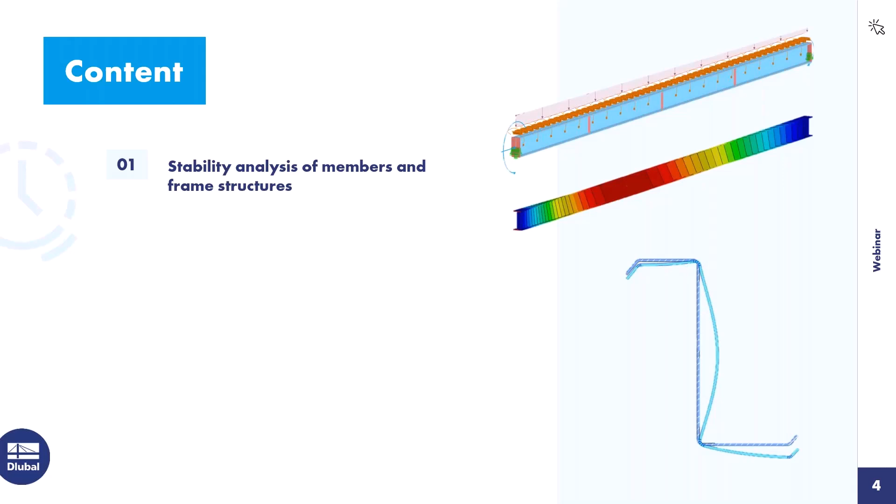First I want to focus on the stability analysis of members and frame structures. Second, I want to go to the stability analysis on a cross-section level using the finite strip method. Then I want to show you how the buckling analysis is integrated in the steel joints add-on. And lastly, I want to show you how we can use the structural stability add-on for troubleshooting of instabilities, how we can leverage that for that purpose.

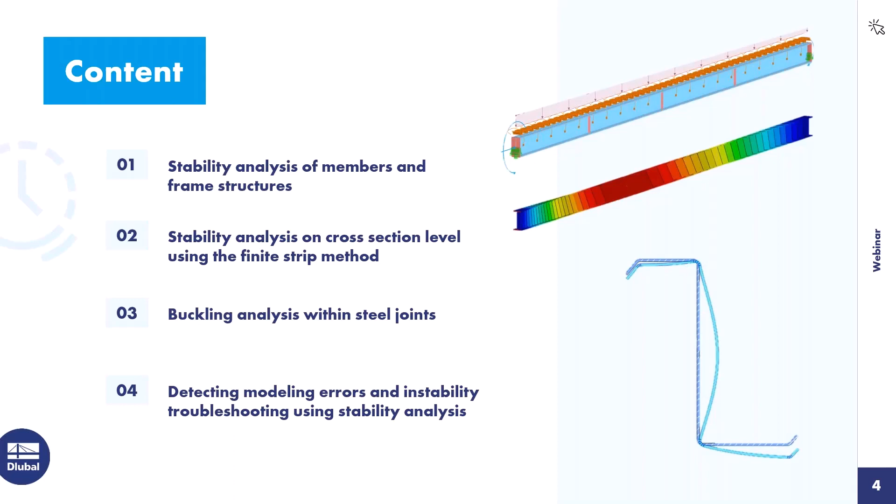Okay, before we jump into the first model, I want to give you a brief introduction and explain at the very least a few points that are related to the stability analysis and how we perform it in RFEM 6. So what elements or structures are we taking care of with this analysis method?

It's usually slender members and structures under compression that tend to become unstable, where the slenderness of a member or structure is not only defined by its dimensions—the greater the length of a structure or member compared to the cross-sectional dimensions, the more slender and prone to instabilities it is—but it's also related to material properties. So if I have a material that has high strength and low stiffness, then it's more likely that stability failure will be the critical design element as opposed to cross-sectional failure.

And then lastly, the boundary conditions play a major role. If I have rotational restraints or lateral restraints for our member, it's not that likely to become unstable. And what do I mean with unstable? When we reach the unstable state, we have no clear state of equilibrium. We have instead a bifurcation of equilibrium, so there are multiple paths that the structure may follow.

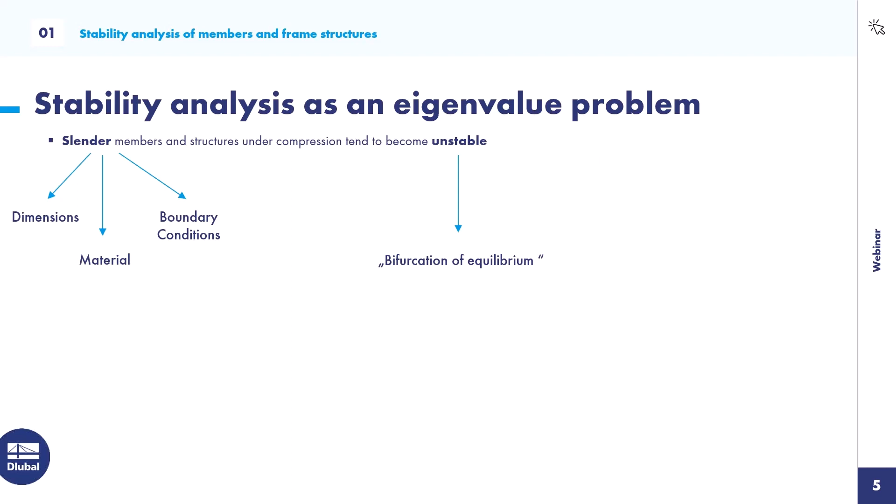That's why this linear stability analysis is often referred to as a linear bifurcation analysis, or LBA. I might use that abbreviation along this webinar as well. And also the critical load may also be named sometimes as bifurcation load.

Using the FEM, the ideal bifurcation load can be determined by solving a conventional eigenvalue problem. So we can set that up and solve that. In that context, what does ideal mean? It means for the stability analysis that we treat the structure as linear. So we assume a fully linear structure behavior and a perfect geometry, so the base geometry of our model is used in this stability analysis.

The eigenvalue problem in the general formulation has two symmetric matrices, A and B, the eigenvalues lambda, and the respective eigenvectors x. To solve for the unknown eigenvalues lambda, we have to set the first term of our formula to 0, and that's mostly done by calculating the determinant of this first part in the bracket and setting it to 0. We have multiple numerical tools or solvers to do that.

In our specific case, in the stability analysis, our two symmetric matrices are represented by the linear stiffness matrix and the geometric stiffness matrix. The geometric stiffness matrix is dependent on the loading conditions. That's also why, before we can solve a stability analysis, we need to perform a structural analysis to determine the internal forces in the system and the entries in the geometric stiffness matrix.

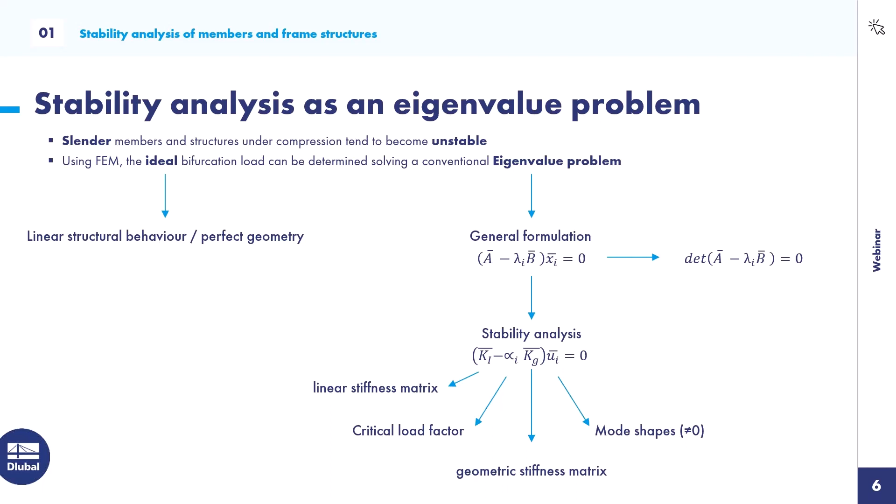In the first step, I want to go into our program now and try to simulate an Euler case 2, and make a small comparison to see if we can evaluate the correct critical load according to Euler, and what else we can get from this structural stability analysis. So let's jump into the program - I have prepared some smaller models for you.

The first one is this simple Euler case. I have an HEB 300 beam with a length of 5 meters, and I applied a unit load of 1 kilonewton that sets the member under compression.

In order to perform a stability analysis with our add-on structural stability, I need to first activate it, and I can find it in the base data of the model. I activate the respective add-on here, which you can find under analysis add-ons, click OK.

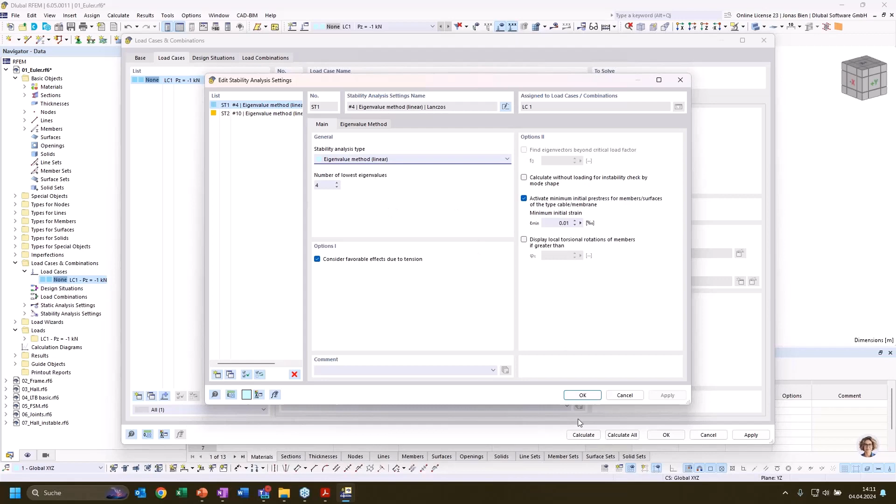4 eigenvalues are enough for our simple case, so I keep this number set here. And then we have these multiple solver variants to solve the determinant of our eigenvalue problem. But the default solver should mostly suit us for this problem.

There might be cases where you have subsystems that are not connected to each other. Then this default solver will throw an error and suggest another solver variant. But with these default settings, I can just run the load case.

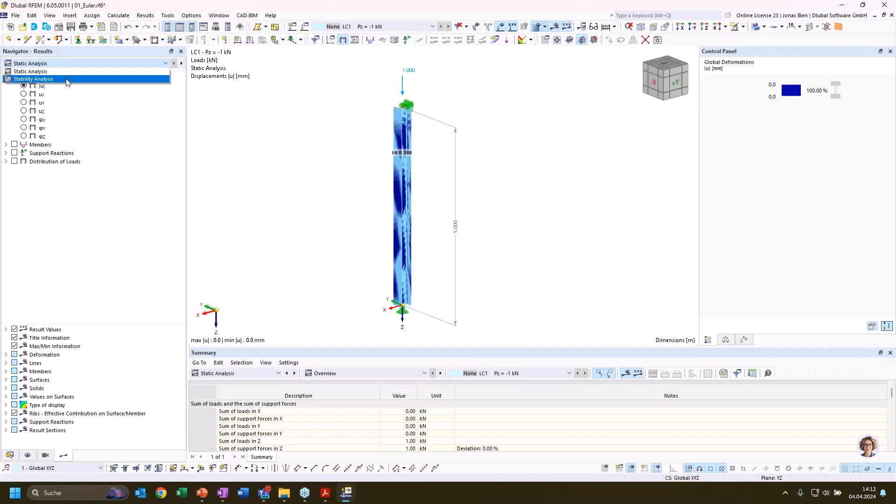Now the first thing the program is doing is solving the static analysis, and then solving for the stability analysis. When I have performed the stability analysis, I not only get the results for the static analysis, but I can also switch to the stability analysis results using this drop-down menu here.

Okay, so what do we see here? First of all, we get a drop-down menu here in the upper left corner, and also in the table we can see that we have these 4 mode shapes calculated with a respective critical load factor.

This represents the factor which I can multiply the external load with until my system would collapse due to instability. So if I would increase the unit load of 1 kilonewton up to 7,035 kilonewton and run a second order analysis, my system would become unstable and I would get an error message saying so. So I can read these critical load factors here.

Then we have also a magnification factor, which is also known in steel construction as the Dischinger factor. It can, in some cases, be utilized to calculate internal forces according to second order theory by just multiplying this magnification factor to the first order internal forces. That's not commonly used, but I just want to highlight that this is the magnification factor because it's denoted with the parameter alpha. And in some other cases within our program, you will find that the critical load factor or the bifurcation factor is denoted with this same alpha parameter, so that you are not confused when you see this parameter in another context.

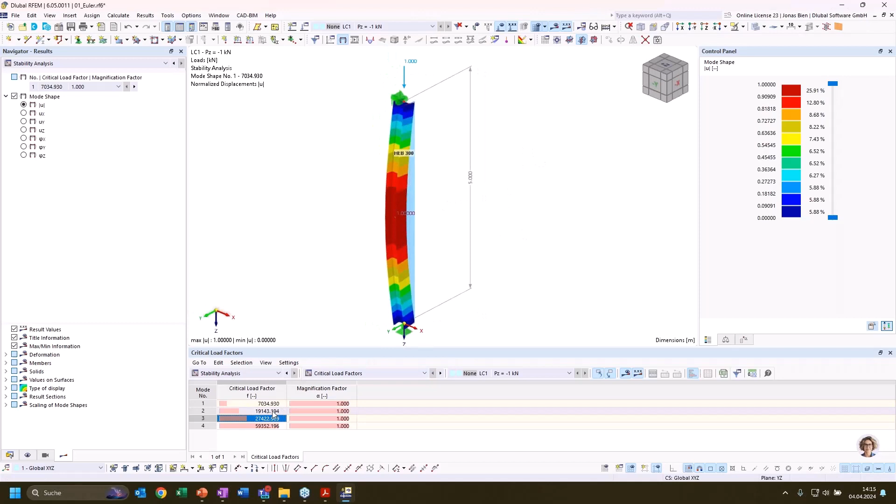Then the second mode shape would be buckling around the strong axis. And the third and fourth eigen modes are some multi-wave eigenmodes for buckling around the weak axis. These are mostly not very interesting for us, so usually only the mode shape with the lowest critical load factor is of interest for us.

And I want to now compare the critical load factor that we have calculated here with the critical ideal Euler load that we have for our Euler case 2.

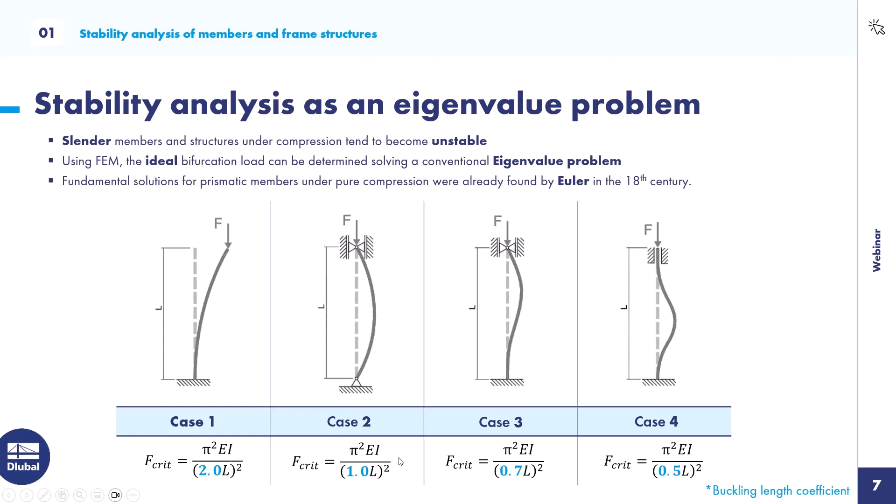Just so that you remember, we could calculate it just using this formula: pi to the power of 2 times the Young's modulus times the moment of inertia of our section, divided by the effective buckling length. In this case, it would be the length of our member times 2, to the power of 2. And I could do that using my calculator, but then I would need to look up all the values for my section, the member length, the material properties, and so on.

So I want to show you an alternative solution. We can also use the in-app console that we can open via the toolbar. And in here, I can reference all the objects that I have in my model. For example, I could reference my material number 1 by typing this and then typing a dot, and then I see all the options or the properties that I can ask this object for.

For example, I would find the elastic modulus here, and if I press enter, then I get as an output the elastic modulus of our material number 1 in SI units. So that's important. And of course, I can do some more complex calculations here. I could now take this elastic modulus and multiply it with the moment of inertia of my first section.

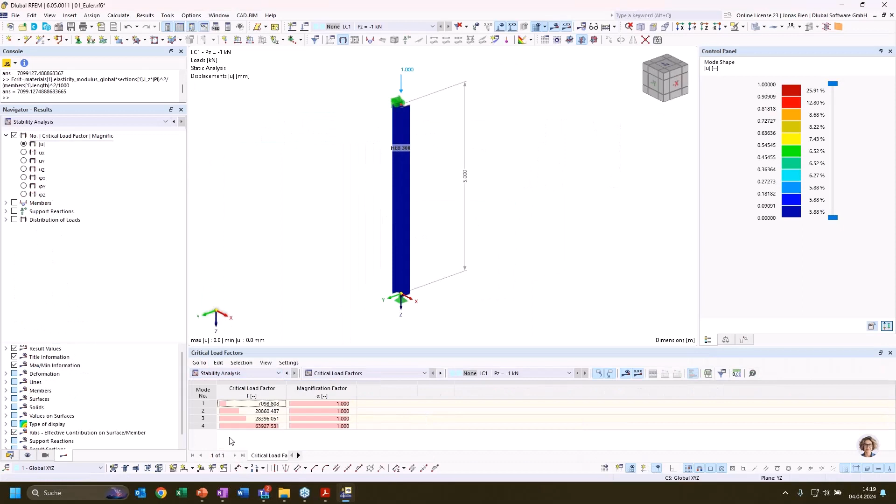So if we want to compare values, we can manually deactivate the shear stiffness for our section in RFEM and do the calculation again, and see what our critical load factor would now be. And if I again go to the results, we now see that our critical load factor is much closer to the ideal Euler load.

It compares very, very well.

So we could, of course, also calculate the critical load for buckling around the strong axis. We just need to swap the Z with a Y value, and we have the moment of inertia about the strong axis. This value is quite satisfying when we look at our result from the structural stability add-on. So that compares quite well. We've, as we expected, met the results of the analytical formula.

Now that that's set and we are confident that our solution provides reasonable values, I want to show you another important result of our stability analysis when it comes to member results. This is often used for the later design of the column. If we, for example, take a classic approach to design this steel column using an equivalent member method, we would need the effective buckling length. We can use the structural stability add-on to calculate the effective buckling length for this equivalent member method.

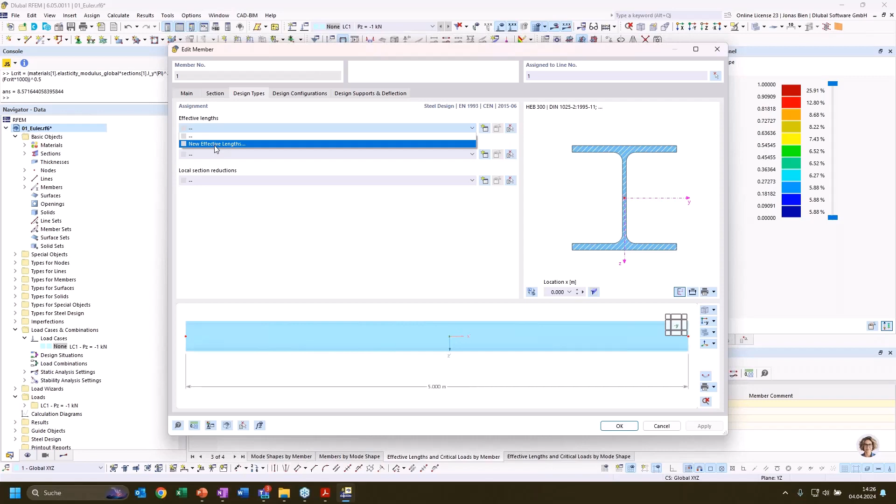One thing I want to show: we can directly import these buckling lengths into our design add-on. If I want to design this column with our steel design add-on using the equivalent member method, I have to assign these effective lengths, and here I have the option to import the buckling length from the stability analysis.

If I click this, we get another tab where I can enter the load case, the mode shape, and the member number. Now it would take this buckling length coefficient from mode number 1 for beam number 1 and evaluate the effective buckling factor, using it for the design.

In this case, we have to take care that buckling around the strong axis happens in mode number 2, so it is observed in mode shape number 2. So we would need to enter mode shape number 2 here, and mode shape number 1 would be for the buckling length coefficient for buckling around the weak axis. So that would fit and suit our expectations.

Of course, we can do that for more complex systems as well. We just need to keep in mind that when we have a more complex system and change something, the order of the mode shapes can also change. They are always sorted by the lowest eigenvalue or the lowest critical load factor, so the mode shape with the lowest critical load factor is always mode number 1. If we change something in our system, this sorting can change, but these entries need to be checked again because they are not smart enough to adapt to the changed model.

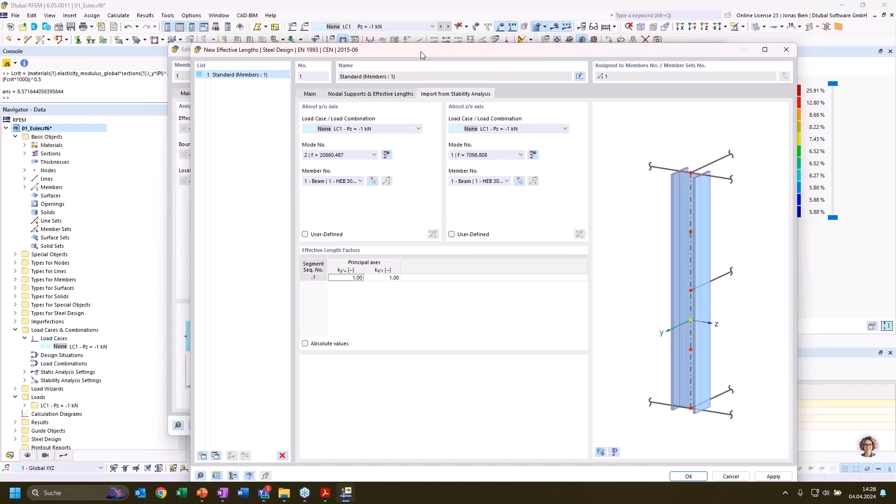So we would do that manually. That's something we need to take into consideration and always keep in mind. Sometimes it's just better to do the stability analysis and then manually put in the buckling length coefficients here, so we don't need to make any thoughts about it anymore.

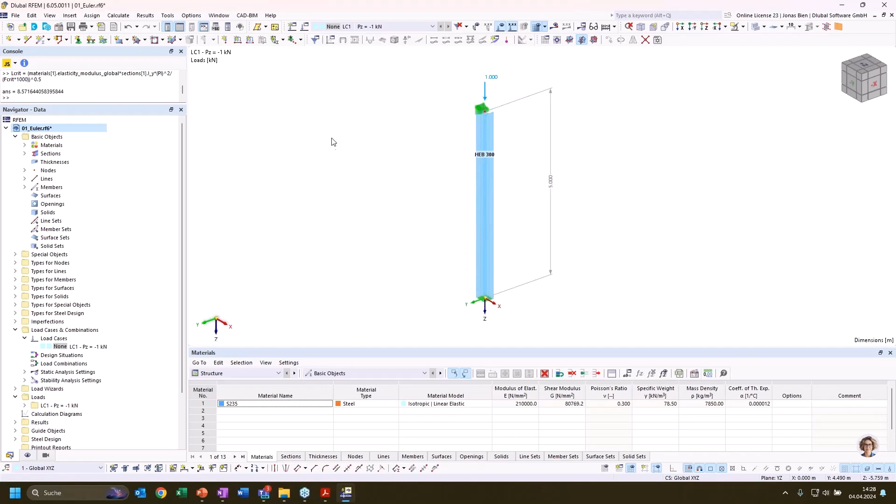All right, but that's not what I want to focus on now. I want to show you instead how the buckling length coefficients change or adapt when I adjust the statical system. So when I, for example, take a rigid boundary condition at the member at the bottom of this column, it should calculate a lower buckling length coefficient because now the system resembles Euler case number 3.

We know that here we would expect a buckling length coefficient of 0.7, and that's exactly what we get for the first mode shape for the weak axis and the second mode shape for the strong axis in this case.

We also need to take into consideration that for these cases, why should I use my add-on here? Because these cases are known, I can just apply the Euler formula and calculate my buckling length.

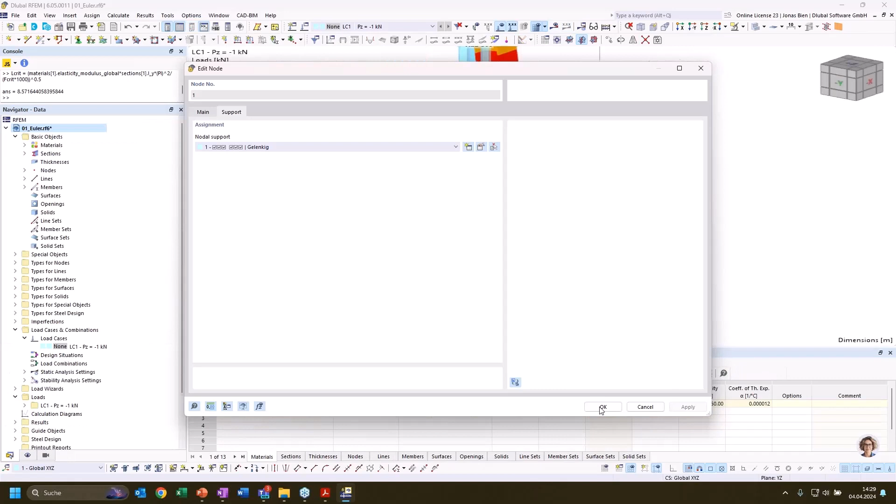But what if we have something like a certain spring stiffness here, which means I'm with the stiffness somewhere between Euler case number 2 and Euler case number 3? Here it's not so obvious what the buckling length for our equivalent member check would be.

Of course, we could look into textbooks that have these cases covered, but also here we can use the structural stability analysis to evaluate the effective buckling length factor. As we expected, it is between 1 and 0.7.

So everything's set. Because it's a linear analysis, it's interesting what the program does with nonlinearities. So, for example, if I apply some kind of nonlinear boundary conditions here, which at first glance don't look that nonlinear...

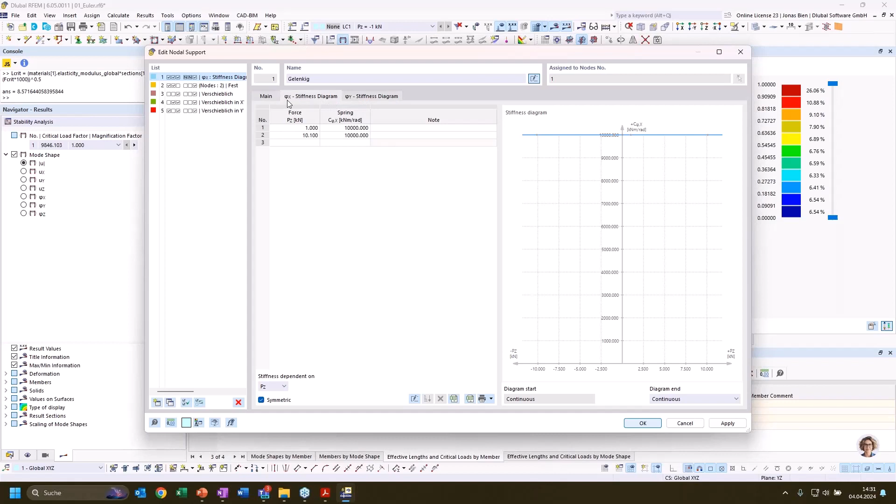...because in this case I want to apply a stiffness diagram where I have the stiffness of our spring at the column bottom in relation to the vertical load. But as you can see, it should be constant, and no matter what the vertical load in the column is, the spring constant should always be constant. So it doesn't look nonlinear at first glance, but we have to take into consideration that all these nonlinearities are ignored in the structural stability analysis.

I want to just demonstrate this. So although we have set this nonlinear spring stiffness at the bottom, as a result we get Euler case 2, where a pure hinge is assumed at the bottom. So when it comes to the supports, only these entries are taken into consideration for the structural stability analysis.

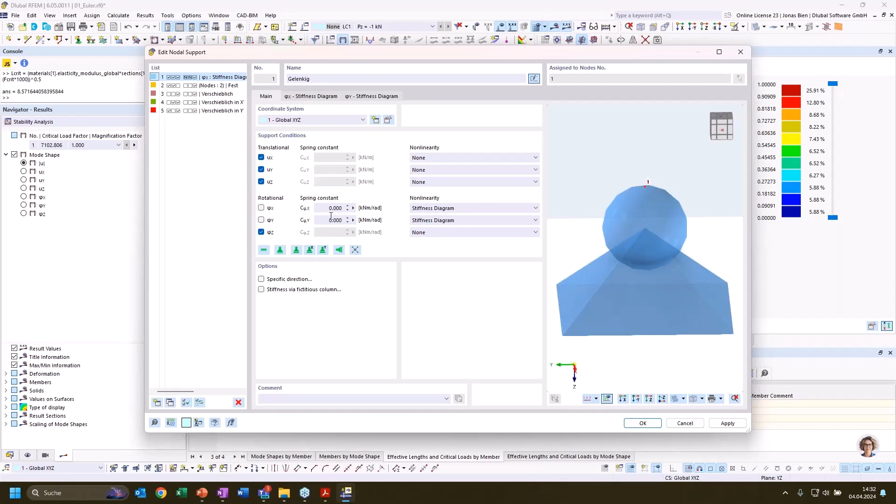Of course, when we are working with other nonlinear elements such as tension rods or buckling members, these are taken into consideration or not according to their state in the static analysis. So if we have a tension member that is under tension, it will be taken into consideration in the structural stability analysis as well, and vice versa.

Okay, then one last thing to finish this simple example here. Let's delete this nonlinearity and see what happens if we divide this member in half.

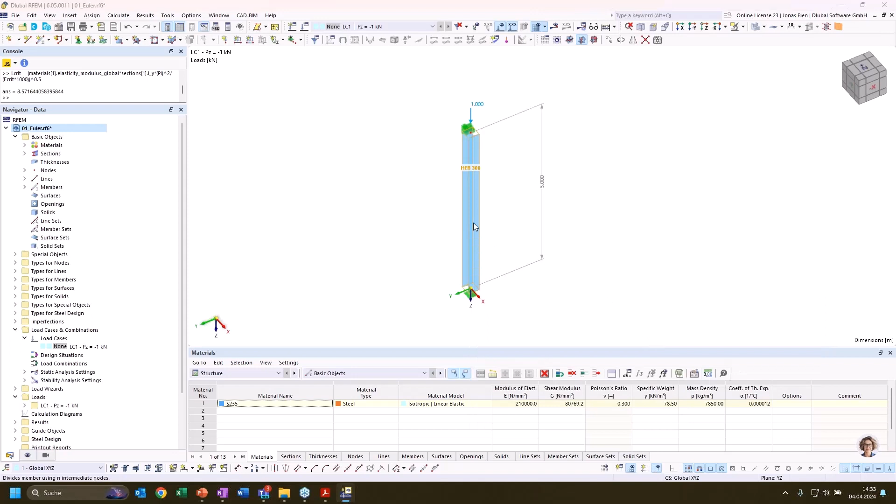I just introduce an intermediate node and divide this one column into 2 separate members, and again run the structural stability analysis.

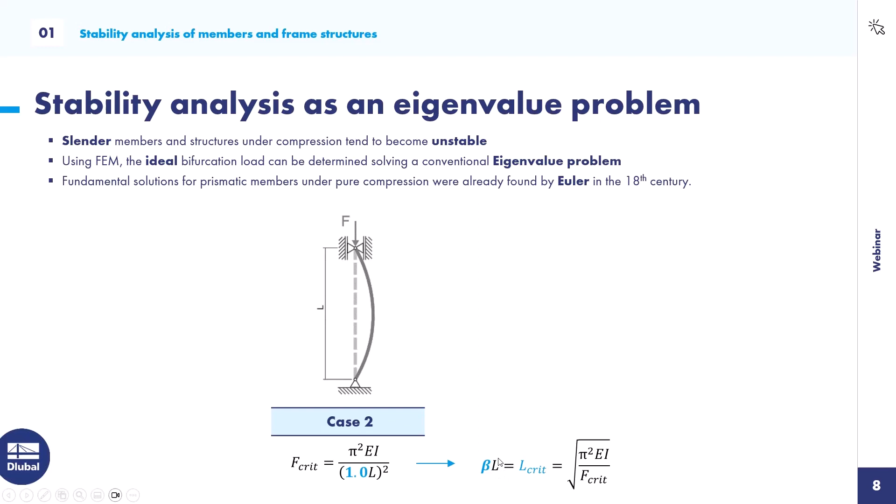So now we have two members, but the effective length for each member is still 5 meters, and that's what is expected when we again look at the formula for the calculation of our critical buckling length, because the Young's modulus, or the moment of inertia, have not changed, and also the critical load factor has not changed. The only thing that changed is our reference length L for the member. It's divided in half, and that is then only visible in the buckling length coefficient, which is now 2 instead of 1 for each of the members.

So we could still use this effective length factor for the stability design within steel design, or some design add-on. It would still be valid.

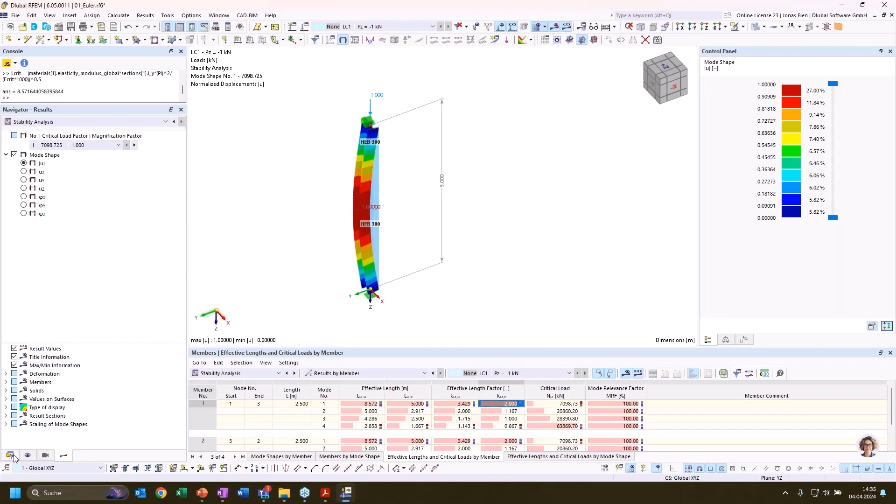Okay, now let's jump into, or increase the complexity a bit. So what if we have more than one member in our model?

So in this case, we have a 2D model of a 2-hinged frame with an additional column number 5, that is just connected to this 2-hinged frame by a truss member. So this is basically a simply supported column, just as we have seen it before, which leans toward this 2-hinged frame here, or is supported by the 2-hinged frame at the column head.

All 3 columns, so member number 1, 3, and 5, are loaded with a load of 1000 kilonewton in compression. And now let's perform a stability analysis for this load case as well. It should be all set for this analysis, same settings as we have used them before for the Euler case.

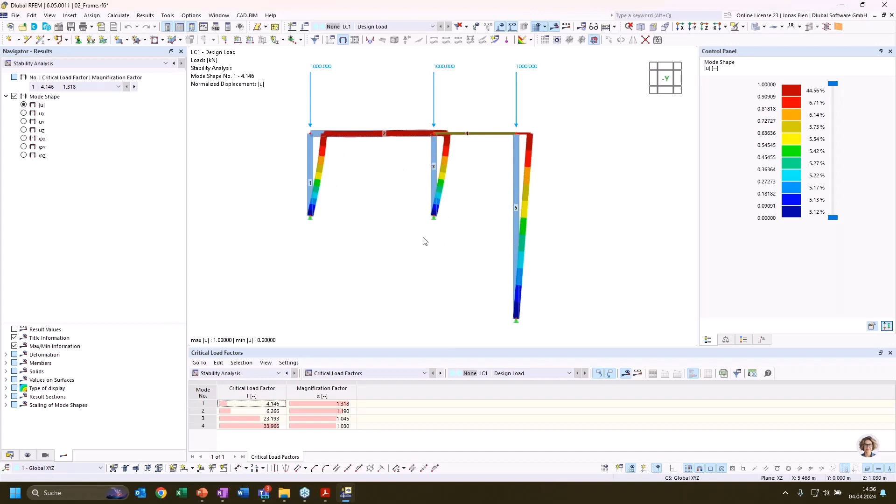And accordingly, we also get 4 mode shapes for our structure. I want to quickly browse through these mode shapes together with you. So the first one is some asymmetric lateral deformation of the 2-hinged frame, and also this connected pinned column is also moving with the 2-hinged frame.

Then the second mode shape would represent buckling of the longer column with the pin supports around the strong axis. The rest of the structure does not seem to have any deformation. And the third would also be a higher mode of this pinned member number 5, and mode shape number 4 would resemble a symmetric buckling mode of the 2-hinged frame without any participation of the simply supported column here at the side.

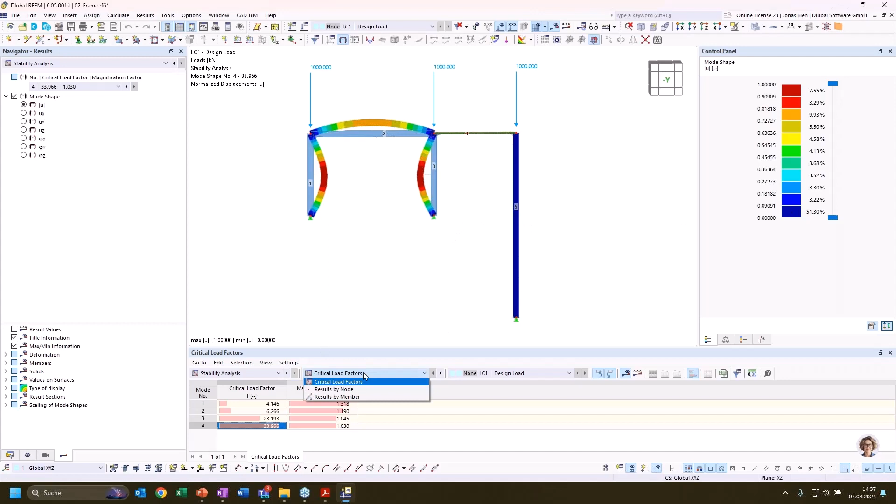So if we want to now extract the effective length, for example, for the columns here of the 2-hinged frame, we can again go to the member results of the stability analysis and check the effective length by member, and I can then click on one of those members, and I will automatically be routed to the respective table entries.

And now in the first mode shape, as we have seen, this 2-hinged frame suffers from buckling around the strong axis, and we could read the effective length factor accordingly for the strong axis in this column right here. So we would get an effective buckling factor of 2.8, which is also in the realm of the expected results for such 2-hinged frames.

If we now neglect this simply supported column here at the side, we would expect some effective buckling factor higher than 2, and the exact value would be influenced by the stiffness of the girder and the columns, and of course the length and so on. Now with the additional column, it's also influenced by that. So that would be quite clear.

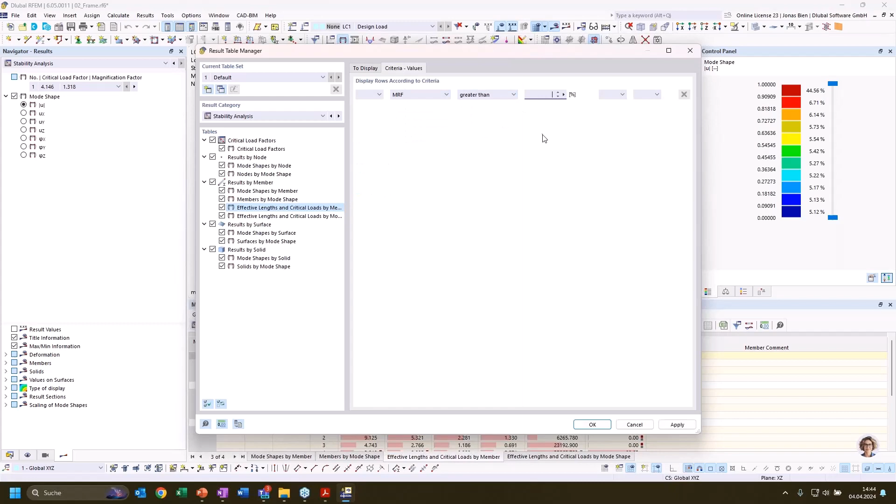Because here I would go the other way around. When I'm interested in the relevant buckling factor for column number 1, I would go through the modes that I have calculated and only take into consideration the mode shapes that have a mode relevance factor that is significant, and read my buckling length factor from the mode that has the lowest critical load factor. In that case, I would definitely take the value of 2.8 for column number 1 and also for column number 3.

All right, but I want to show you in the next step how we could also leverage this tool in a more realistic setting, or how to approach the buckling length determination in a more realistic model.

So here we have an industrial hall. We have a lot of different load cases here that of course would give us some, I don't know, probably about 100 or 200 load combinations. Of course, in some applications, we can have a lot more load combinations.

And then the question is which load combination, or the first question for our buckling length determination, is which load combination is most severe for buckling for a specific member. And I have now, for this case, deliberately started with result combinations, because sometimes, for example, when I want to design bridges or so, I may have 10,000 load combinations, and it's not possible to calculate all 10,000 load combinations and assess them for stability.

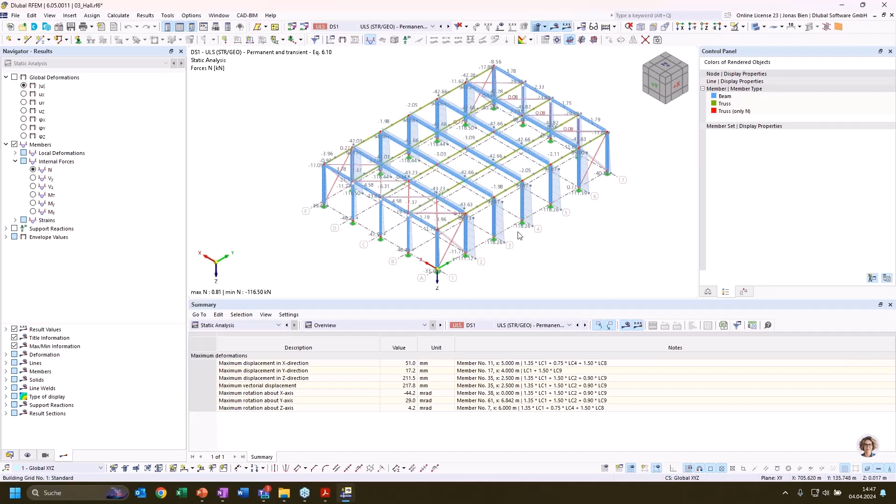I would, in the first step, calculate my combinations with result combinations to get the envelope of results. I need to calculate the design situation where all the complete envelope of result combinations is given. Then, for example, when designing the columns for buckling, I would look into the internal forces in this envelope solution and look for the most critical ones for buckling, which would be the combinations that give the highest compressive load in the columns. I can find those if I go to the static analysis results for this design situation.

Go to results by members, internal forces, and let's stick to this middle column here. I click the column and get, in this result combination, all extreme internal forces for this member. So for example, I get the combination with the highest axial load, including the sign, and the lowest axial load. The same is printed for the highest shear force in Y direction, highest shear force in Z direction, lowest shear force, and so on. But we're interested in buckling, so I'd look for the combination giving the highest compressive load, which is this one here with minus 116 kilonewton. In the last column, the loading or load combination that leads to this axial load is presented.

Now, from the result combination, I can just right-click this combination to generate a load combination from this table. For this load combination, where I have the feeling this could be the most relevant for buckling of our columns, I can now perform an eigenvalue analysis, a linear stability analysis, by activating it here and calculating it. So now I very specifically run the stability analysis for just this one load combination that I've generated from the envelope.

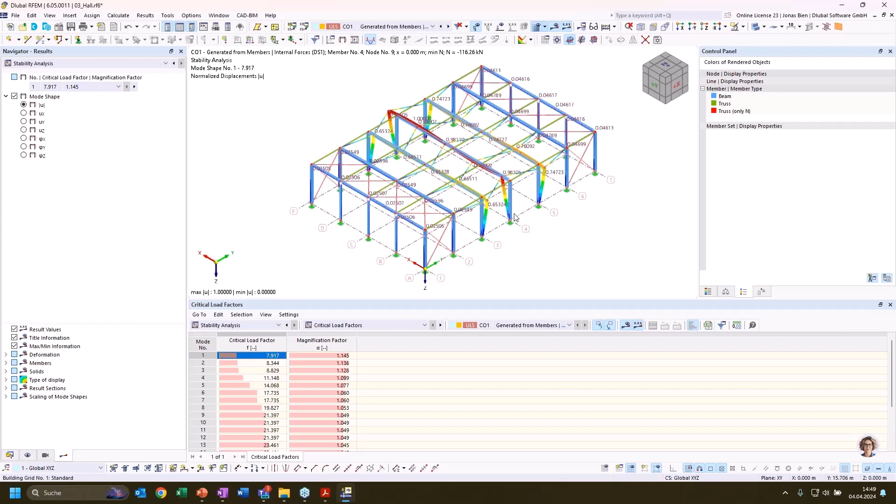Now the second question, after sorting out which design situation could be relevant: I need to figure out, for this column, which mode shape is most relevant for determining my buckling length. As before, I have 20 critical load factors and mode shapes, and I can browse through them. I see some involve deformation or buckling of the frame where this column is involved. Some are only isolated buckling of those columns, or some compressive member in the roof. So these wouldn't really interest me.

In order to filter these out, I can again use the mode relevance factor. I go to the table, effective length and critical length by members, and click on my member number 4. I get the whole table here, showing the mode relevance factor for all 20 mode shapes I've calculated, and I see that only in 2 of these mode shapes is my column member really participating. So these would be the only 2 mode shapes suitable for extracting the buckling length.

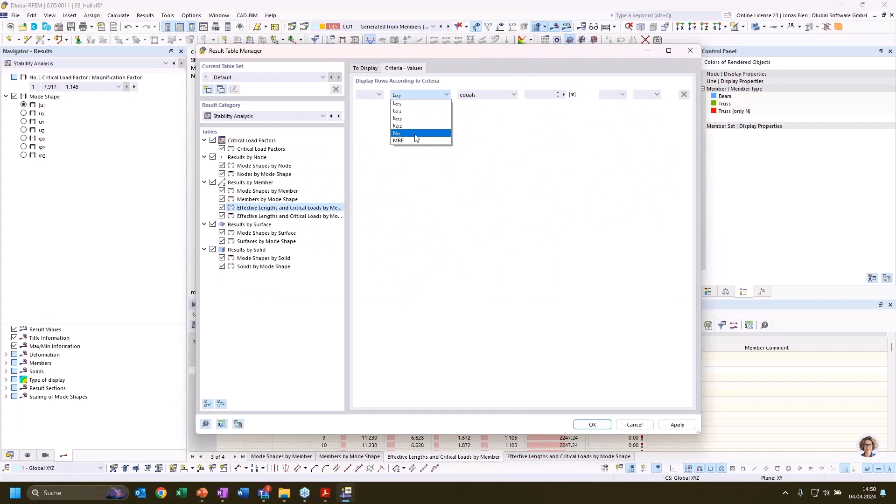I could, of course, apply the filter to make it more accessible. Then I'd follow the rule from the last smaller example: take the mode with the lowest critical load with a significant mode relevance factor, and take the effective length factor for buckling around the strong axis from this mode shape. This is how the mode relevance factor can help you assess the relevant mode shapes for a particular member design.

That's what I wanted to show you on this model. Now I want to take the next step and highlight something you may have noticed so far. We've only discussed flexural buckling of members, but especially in steel structures, other stability modes can also govern the stability design of these members, namely torsional buckling or lateral torsional buckling. We can also take those into consideration with our structural stability add-on, but we need to activate warping torsion in order to detect those stability modes.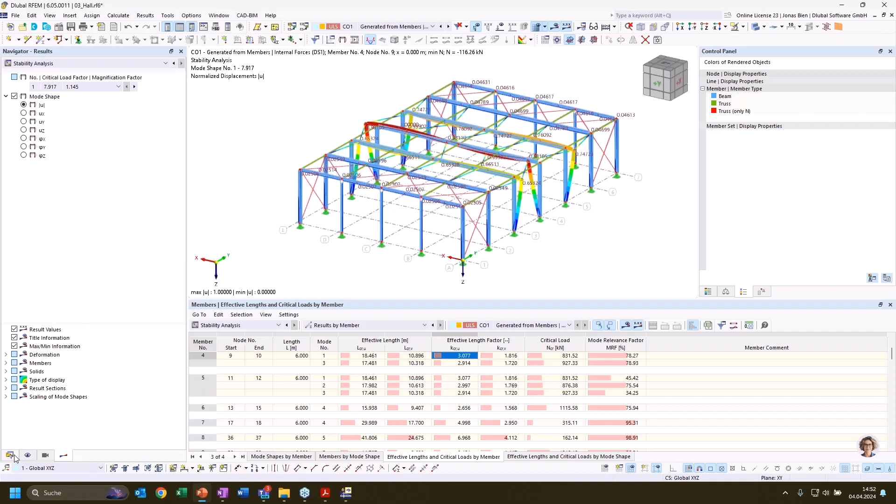I want to make another small example where we investigate the lateral torsional buckling of a simple system, where again, as in the first Euler case, we know the exact solution, and I want in the first step to compare the values we get from RFEM with the analytical value. So in order to perform a structural stability analysis where we can also consider lateral torsional buckling, we would, in addition to the structural stability add-on, also require the torsional warping add-on.

As soon as we activate the 7th degree of freedom, this would be directly included in the stability analysis, or would be taken into account. I have now for this simply supported member here, it's an HEB 300 again, with a length of 10 meters and a constant bending moment.

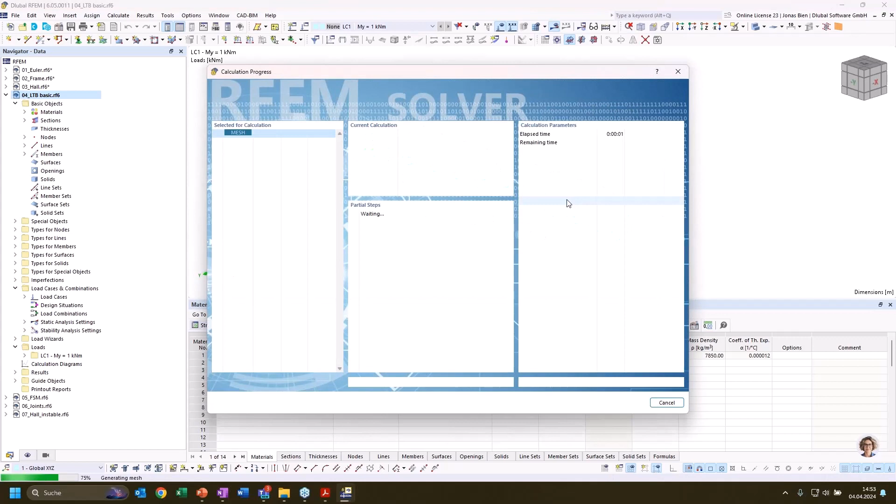I could again run the stability analysis, and now we are not only getting modes for flexural buckling - or we wouldn't get any flexural buckling modes for this member at all because we have no compression in it - but I didn't activate the structural stability analysis for this particular load case, so I will just do that.

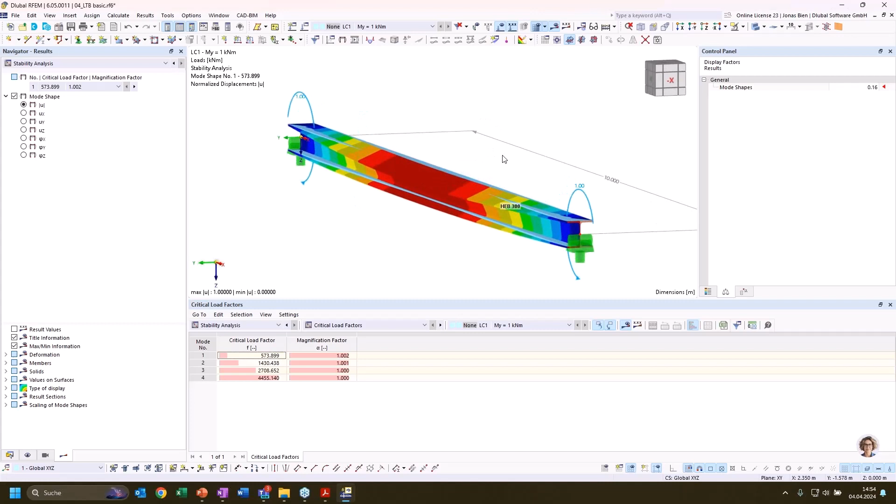And now we should get a lateral torsional buckling mode. When we switch to the results of the stability analysis, we can now see very clearly this characteristic deformation of our member. It tilts and at the same time moves in the direction of the weak axis. And again, we get a critical load factor, and this one we can compare with the analytical solution.

For this simple system, an analytical solution can be easily found in the textbooks. It was once also implemented or written down in some of the codes. For example, in the old German steel construction norm or code DIN 18800. I think in some national annexes of the Eurocode 3, it's also given this formula.

But for our convenience, I already plugged this formula to calculate the critical bending moment for lateral torsional buckling into our global parameters. So that's another thing I can do instead of just using the console and typing in my commands to evaluate certain parameters or values. I can also use global formulas, global parameters, to calculate something.

For example, I have now created a formula for the evaluation of mcrit, and we can look at what goes into it. Maybe this looks somehow familiar to you. So here we have a value or a parameter that describes the moment distribution, which is zeta. It's 1 in this case for this simple case with uniform bending.

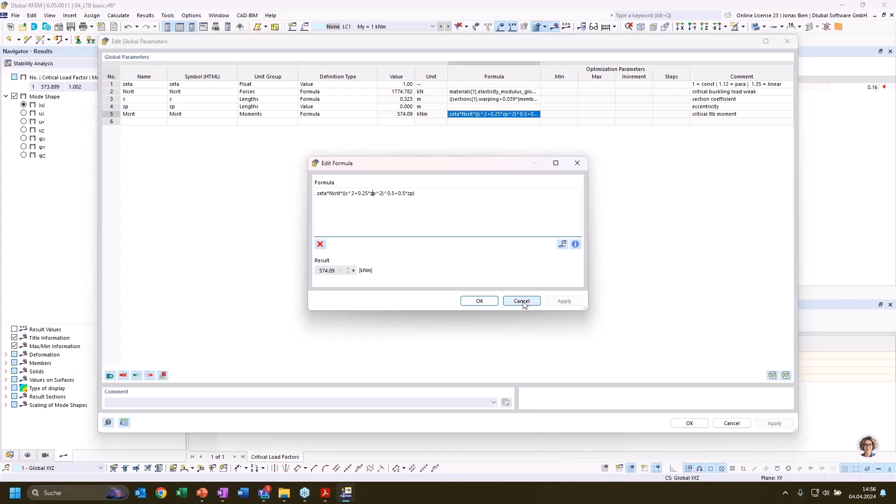We could also use the console again to evaluate this. So all the global parameters that we have stored, we can call them here in our console. And this, in this case, it's again written in SI units, so I would need to divide it by 1000 to get to kilonewton meter. And this is very close to the value that we evaluated here with the structural stability add-on. So it works again quite well.

But of course, as in the Euler case, we can use our structural stability add-on to investigate much more complex cases. For example, we could add member support. So I go to the member and add a support, and then I get this tab here where I can enter a member support. I could manually put in some rotational restraint. I could even apply an eccentricity of this member restraint. For example, I could say I have a rotational restraint at the top of the flange.

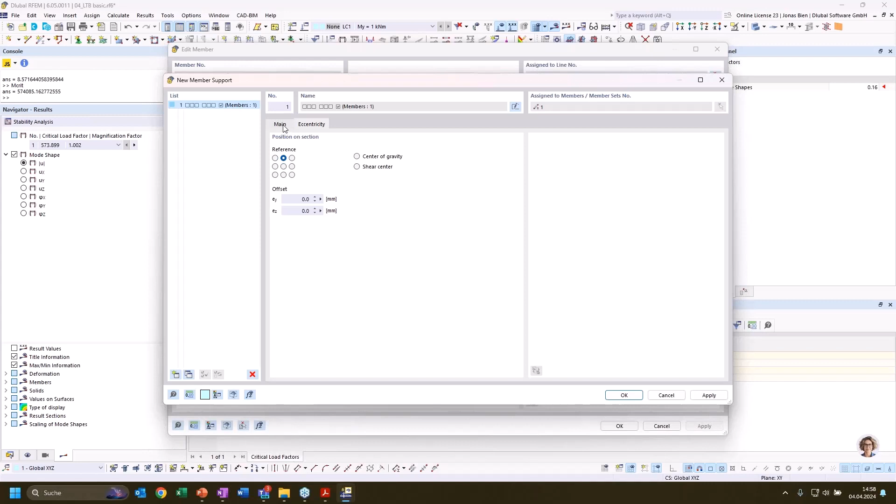And we can now also in the global analysis take into consideration shear panels and rotational restraints. So these are also entered as fictitious stiffness. And you may know them from steel design or aluminium design or timber design, where you had always access to those restraints, and they were only considered in the design of the member, so in the design add-on. But we can now use them in the global structural stability analysis as well.

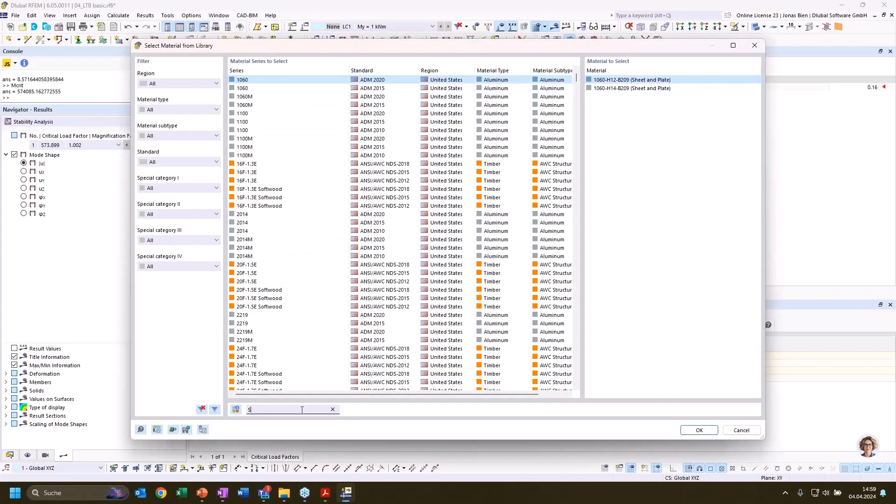So I could, for example, define a rotational restraint. For example, I want to consider some kind of sheeting that I have on top of my girder. I will now just take some random settings, more or less. I take some sheeting just to get some stiffness. Of course, these values were accessible all the time, but now we can also leverage or use the stiffness that we define here in this global structural analysis.

And one thing that is also new, and I want to highlight to you, is that for the spring stiffness of the connection between the trapezoidal sheeting and our member, and also for the load introduced to the sheeting, we can now set load dependent values.

So if we click these options here, we could, if we had multiple load combinations that we would like to investigate, set different values for different load combinations - for example, to distinguish between situations where we have suction on the roof and compression or pressure on the trapezoidal sheeting. We could take this into account by adding different values here in the table.

This is also quite new since a few months. With this rotational restraint, I could also add a shear panel. By the way, we are now able to not only add a shear panel in Y direction, but also in Z direction, which could be interesting for columns that are also girders rotated by 90 degrees for some reason. We can use that now since some weeks.

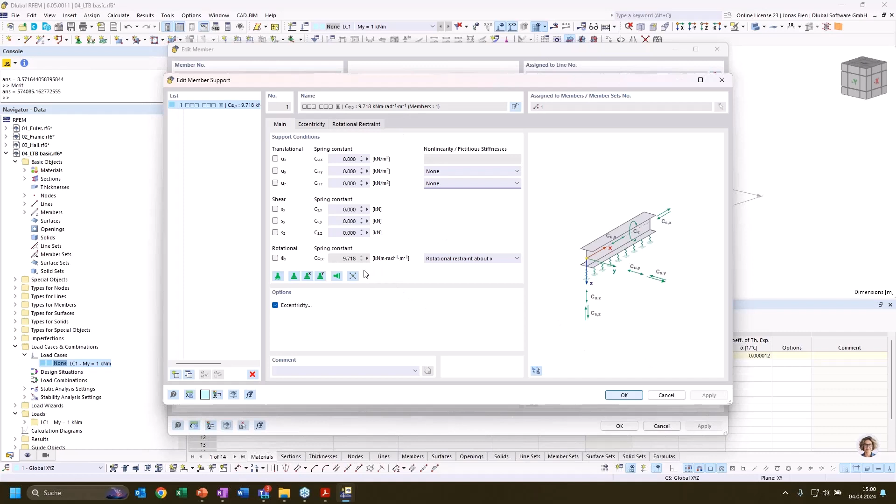And we have now calculated directly some stiffness for the rotational restraint from our trapezoidal sheeting, and we could consider this in the stability analysis to take it into account. By default, these fictitious stiffnesses, so the trapezoidal sheeting in this case, would only be accounted for in the design add-on.

So if we activate the steel design add-on, for example, in this case, because we have a steel girder, and I now activate the lateral torsional buckling check according to the equivalent member method, we already see here that the default way of calculating the critical moment value is using the eigenvalue method - the same method that we also use in the structure stability add-on.

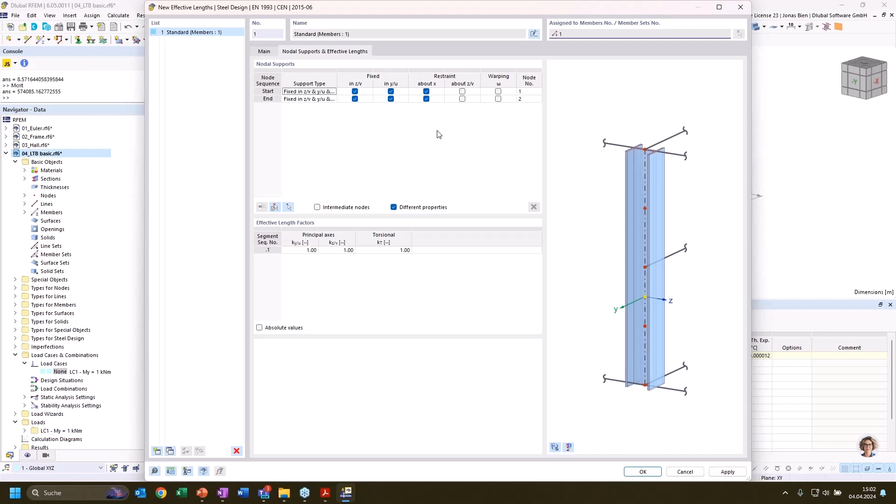Of course, we need to set some boundary conditions here for the design add-on. But in our case, it's quite simple. We have simple support with fork supports, and that's what the default settings are also for the effective length settings. So that should be all right.

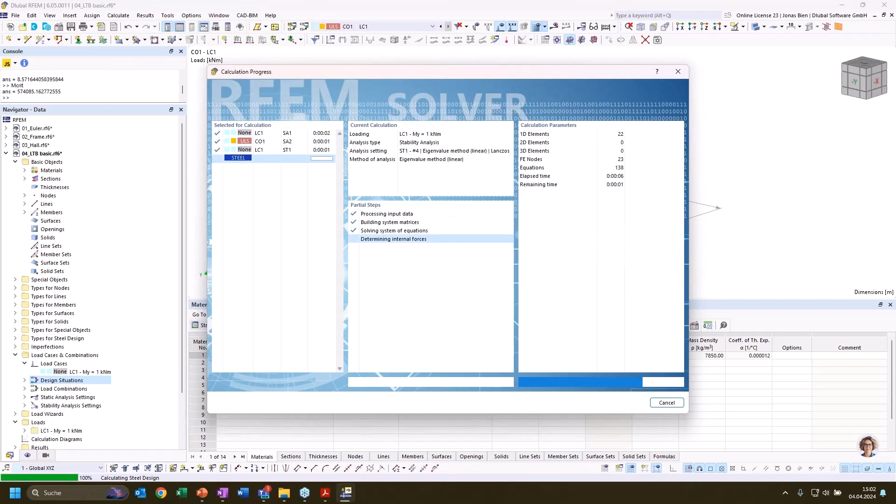In order to perform the steel design, we also need a design situation and some load combination inside this design situation. I will just add a load combination with 1 times the first load case. And if we now do the calculation, we are running a static analysis, then the structural stability analysis of this member, and then the steel design analysis.

Let's check the results and compare them. First, in the stability analysis, it seems like nothing has changed - we still have a critical moment, bending moment of 574 kilonewton meter. But in the design add-on, let's check the result here. We have now the check for lateral torsional buckling here.

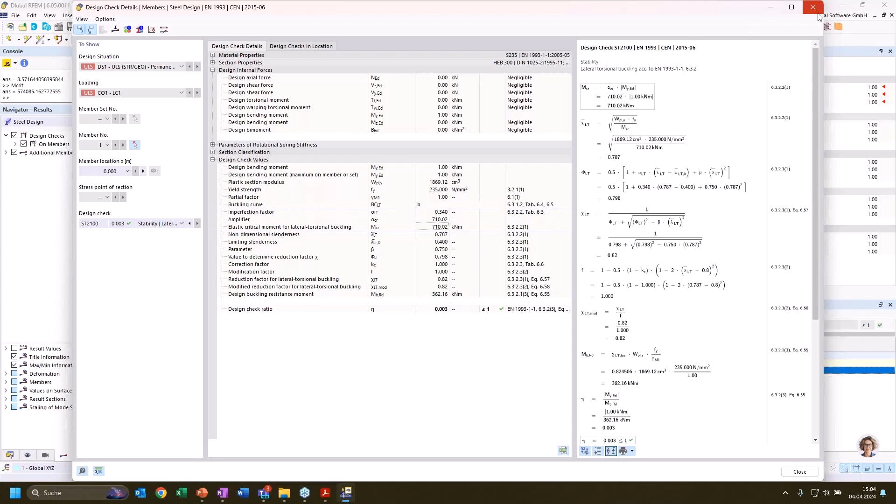We can also see what the relevant mode shape would look like if we click on this design details. And if we double click on the design details, we can also check what mcrit is, or what value for mcrit is evaluated in the internal eigenvalue analysis. We see that now in the steel design add-on, the rotational restraint on top seems to be already taken into consideration, because we have a much higher critical moment in our steel design add-on, while in the structural stability analysis the values stayed more or less the same.

But we now have the option to take these fixture stiffnesses into account also in the structural stability and static analysis. We can do that by adding a structure modification to this load case, and here we just need to activate the option to consider shear panels and rotational restraints also in static, stability, and modal analysis.

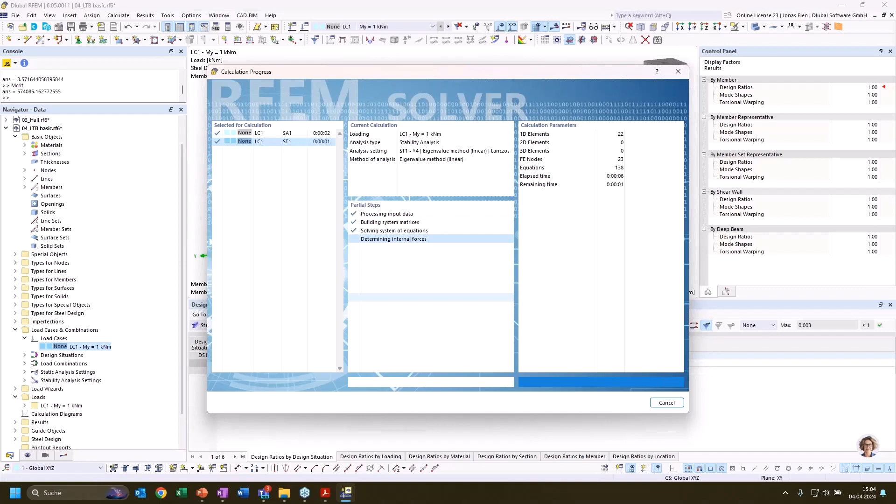Before, it was only possible to take these shear panels and rotational restraints into account in the design, so in the LTB design within the design add-ons. But now we also moved this possibility to the global analysis, because you may want to perform a lateral torsional check, like using a second order theory analysis with imperfections, and maybe you also want these rotational restraints to be effective in this global analysis. That's why we added this option through the structural modification.

What is also new is that you find these objects - the member shear panels and the rotational restraints - now under types for members, and not anymore under the types for the design add-on. In earlier releases, we had those two objects under, for example, the types for steel design or aluminium design or timber design. Now you find them under general objects for types of members.

Okay, so that would be one example of how to evaluate these other failure modes of typical beams, how to analyze all of these typical stability modes of beams. But we can even go further and say, when we do this calculation with our beam models, we always assume that the cross section stays rigid and there are no cross section deformations with respect to the stability analysis.

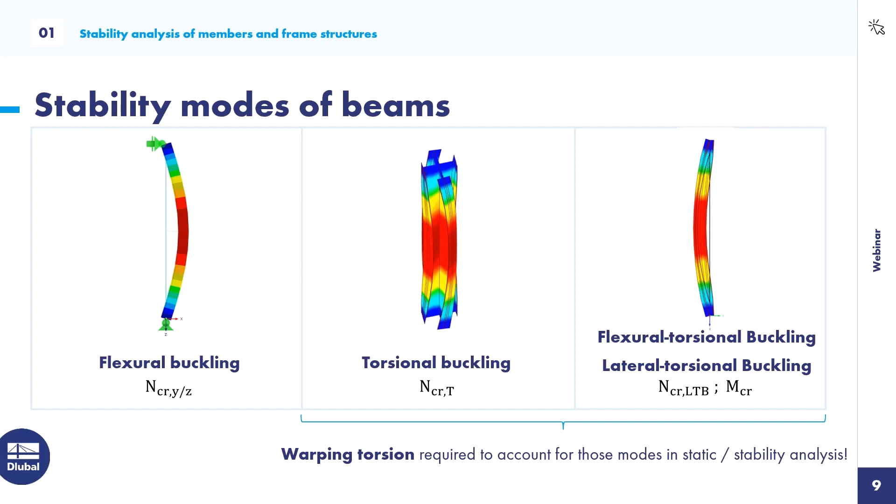If we are interested in local buckling of the cross section, we could extract from these beam models a shell model - that's quite easy in our software. You can just right click on a beam member and say you want to generate a surface model from this member, and surfaces are directly generated with the correct thicknesses, just as they had the thickness for the member. For example, the top flange would have a thickness of 19 millimeters corresponding to the HEB section.

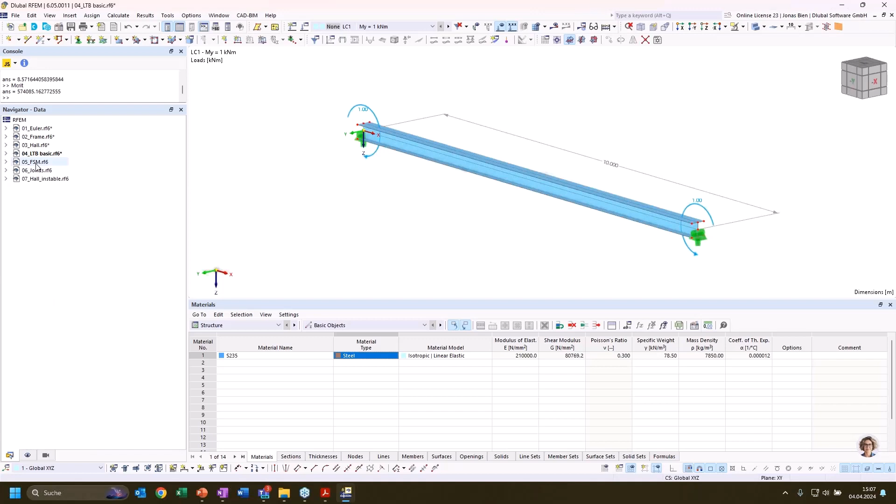Now we could mesh this very finely to do stability analysis for this shell model, and by doing so we could also analyze local buckling modes of the section. Since it's not very interesting to do it with a hot rolled section that isn't susceptible to those local failure modes, I want to do it with a cold formed thin walled section.

So here I have prepared a fifth model where I have a parametric C section with a height of 200 millimeters, width of 75, and a wall thickness of 2 millimeters - a perfect example for a thin-walled, cold-formed section. As I just showed you, I have transferred my beam model into a shell model.

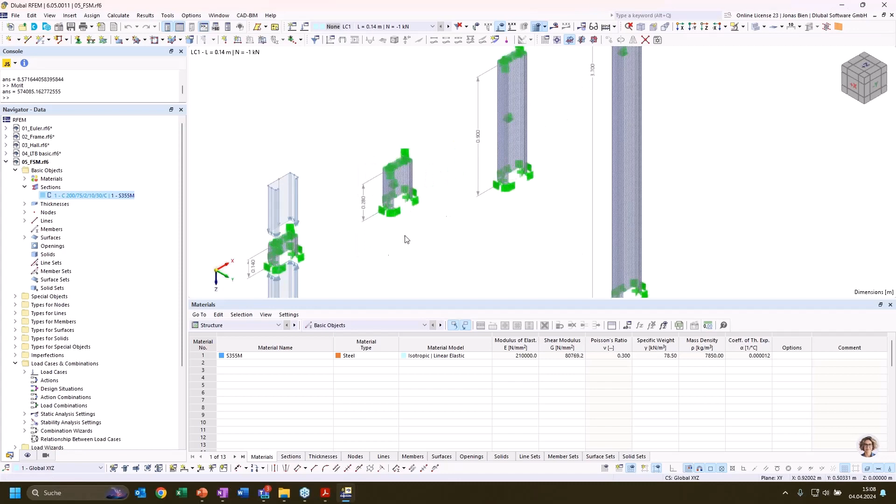I have meshed it very finely in order to get all the relevant local buckling modes. And for this I have modeled 4 different members with different lengths: a very short element of this C section, one with double the length, one with a length of 90 centimeters, and a very long C member as a shell model.

I have applied some boundary conditions that avoid any unwanted singularities in the model, and then applied in 4 different load cases a unity load to the top and bottom of these column stubs. So in the first step, that should resemble the Euler case - a beam with a certain length with uniform pressure applied. But in this case I have a monosymmetric cross section, which is very thin. So let's check out the results - what do I get from such a stability analysis?

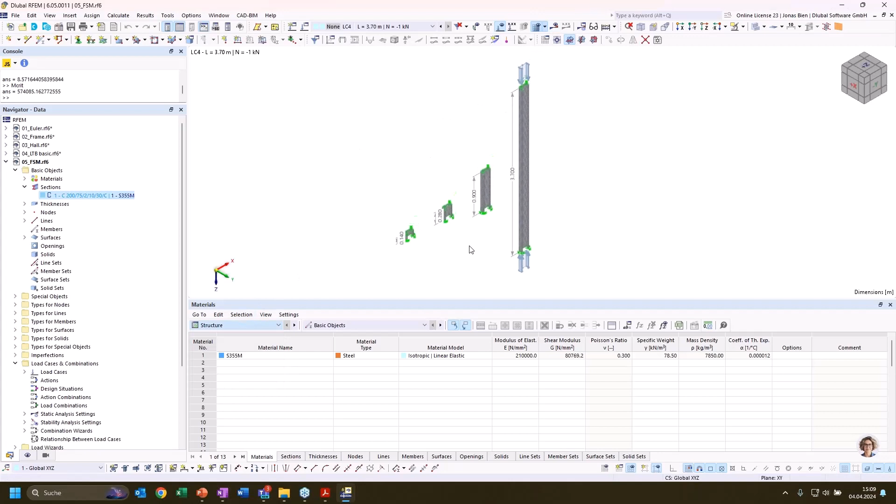Now I have performed a stability analysis of the shell model. If we look at the results for the longest segment, this 3.7 meter long C section, I have the first critical load factor at 84 kilonewton, and I can see that the mode shape resembles flexural torsional buckling. So in this case I don't see local buckling of the different cross-sectional elements, but the whole section deforming at midspan.

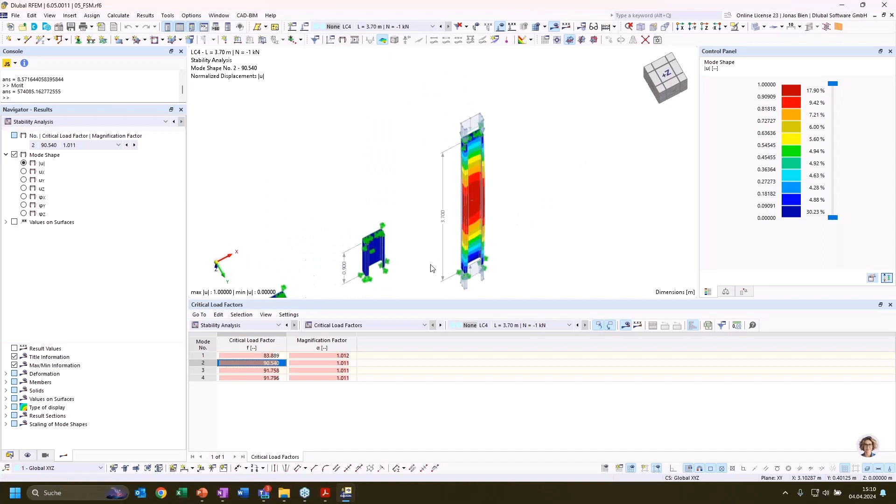If I check the second mode shape, I have buckling about the weak axis. The third mode shape involves also local buckling of the web - and this we can only see with such a refined shell model.

Now what happens if we take a shorter column? We see that the critical mode shape is governed by local buckling. So in this case, global buckling like flexural torsional buckling or flexural buckling wouldn't be the major issue, but stability failure would be more related to local buckling of the web. I can go through this and find several mode shapes where especially my web buckles in different configurations.

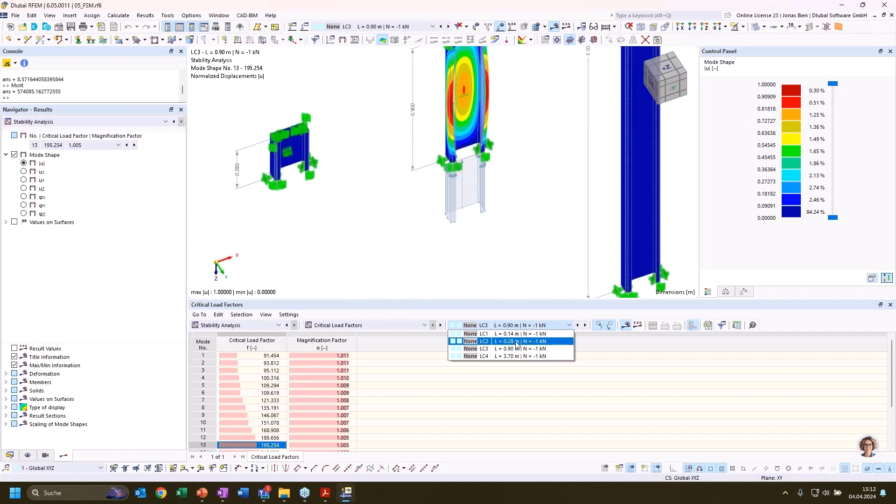In mode shape number 13, I find also a mode shape which is particularly interesting for cold-formed members, and that is distortional buckling. In this case, not separate elements of the cross-section deform, but the whole cross-section bends - if we look at the midsection, the lips are deforming horizontally, and at the same time the web is also deforming. Finally, for the very short configurations, I again find the local buckling modes.

What is also important to note is that the critical load factor is not changing significantly. The first, or most relevant, critical load factor doesn't change much when we compare the three smaller column segments - we are always around a factor of 90.

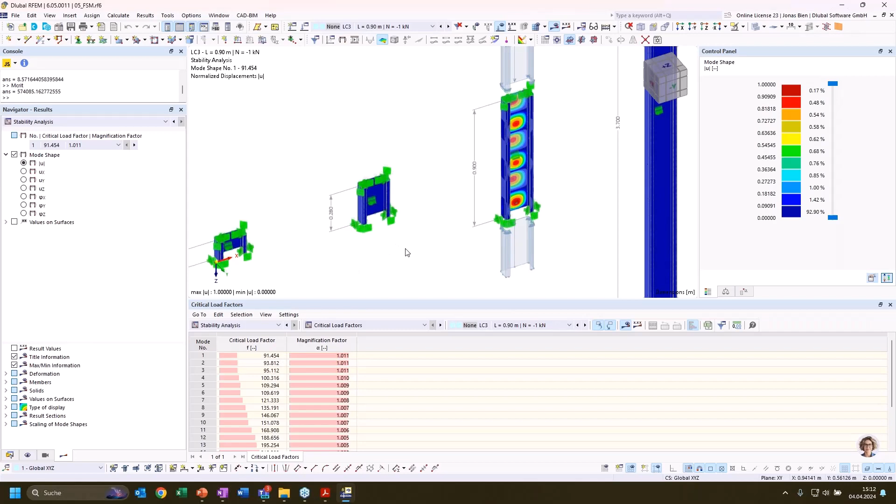But of course, this type of analysis comes with a drawback - it's quite cumbersome to prepare this kind of model. We require quite a fine mesh to get valuable results, and calculation in this case would take 1 or 2 minutes for these 4 cases, because there are quite a lot of elements and degrees of freedom that we need to solve.

But we have also another alternative option to investigate such failure or local instability modes on the cross-section level, and this is kind of hidden in the edit sections dialog. That's why I want to show you that and highlight that we have this feature.

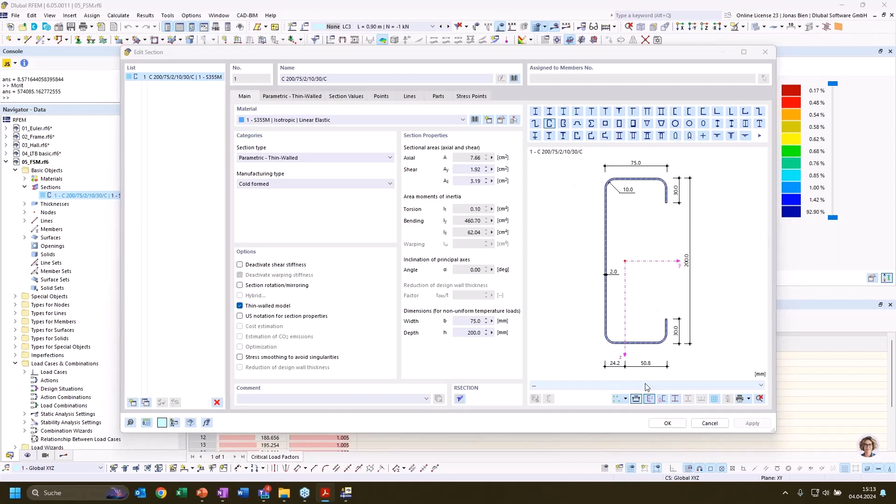For a particular section, we have on the right side this preview of the section with all the dimensions. Below that, we have a drop-down menu where we can find a lot of interesting features and functions of this cross-section, for example unit stresses under certain loads.

But right at the bottom, we also have the possibility to investigate the buckling shape of this section for some unit loads, for example for a 1 kilonewton compressive load or for 1 kilonewton meter bending moment around the strong axis, and so on. If we click on that option, we get a diagram as a result.

And what we get here is the so-called signature curve for our cross-section. It gives the relationship between the critical bifurcation factor for this unit load, 1 kilonewton compression, in relation to the member length.

So we can see that in the start, we have a very low member or small member length. In this case, for example, the first minimum is evaluated for a member length of 14 centimeters, which would be the smallest column stub that we have just investigated with our shell model.

And when we look at the respective bifurcation factor, we see that it's around 90, which does very well correspond to the linear bifurcation load that we have received from the stability analysis on the global level in the shell model.

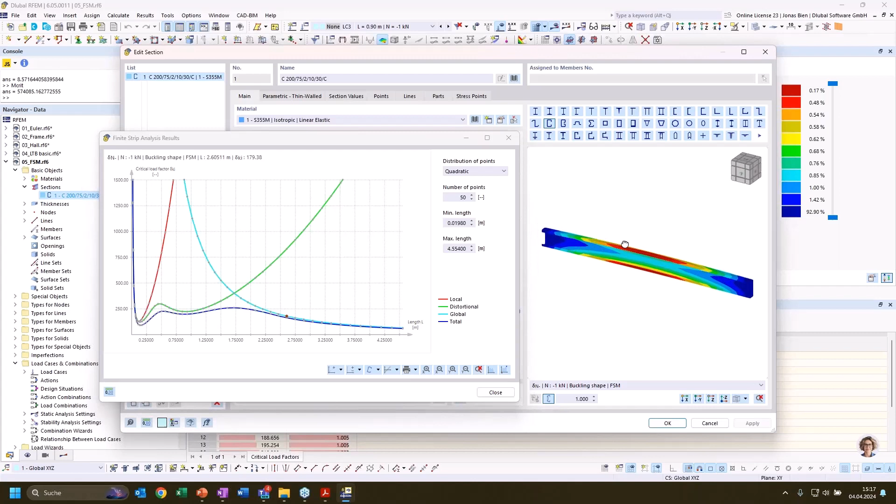And one newly added feature is that we can not only display the results of the cross-section, but we can also directly investigate the deformation of our member with the respective length in 3D.

This is of course also refreshed if I click one of those points on our signature curve, I get the respective deformation of a member of that particular length.

And what happens in the background? As soon as I start this feature here, in the background, the finite strip method is employed, and I want to show you what that means.

As we have now already discussed, we can do stability analysis of beams, which has the advantage that we have very few degrees of freedom. Or we could also investigate stability of members with our shell model, but here we have a lot of degrees of freedom, and the solution takes quite a while.

And the finite strip method is some kind of intermediate accuracy solution where we divide the cross-section into multiple strips, and only one strip or element is used over the length of this member.

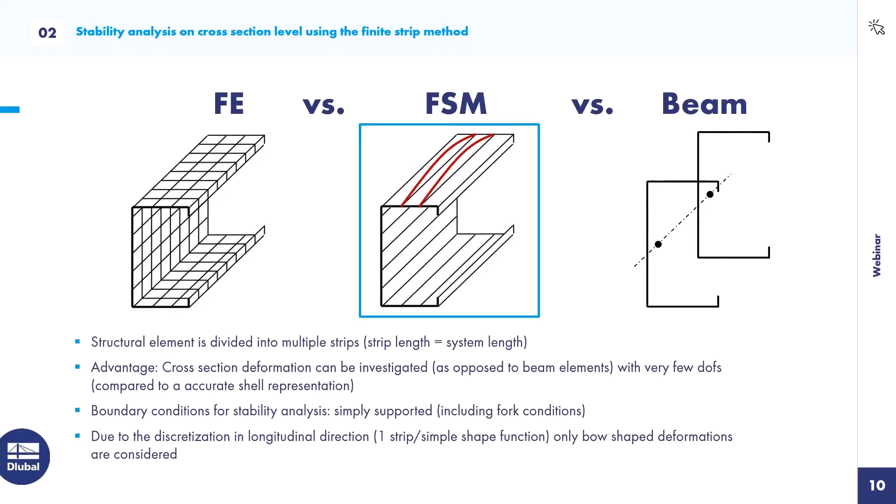One drawback is, if we compare it with the shell element, that at the moment we can only investigate specific boundary conditions. So the results are only valid for a simply supported beam that is assumed in the background.

We can only assess results for unit loads at the moment, and cannot account for any local load introduction. Also, we assume that the behavior over the length of the member and the loading conditions are constant. And because we only use one strip over the length of this element to represent this member, we can only investigate failure modes or eigenmodes that are bow-shaped, with only one half-wave deformation.

But as we have seen in our shell model, there can be, for our second model here with a length of 28 centimeters, also local buckling as a decisive failure mode. We have two buckles over the length of the section, and this cannot be represented or investigated with the finite strip method as we have it implemented in our program.

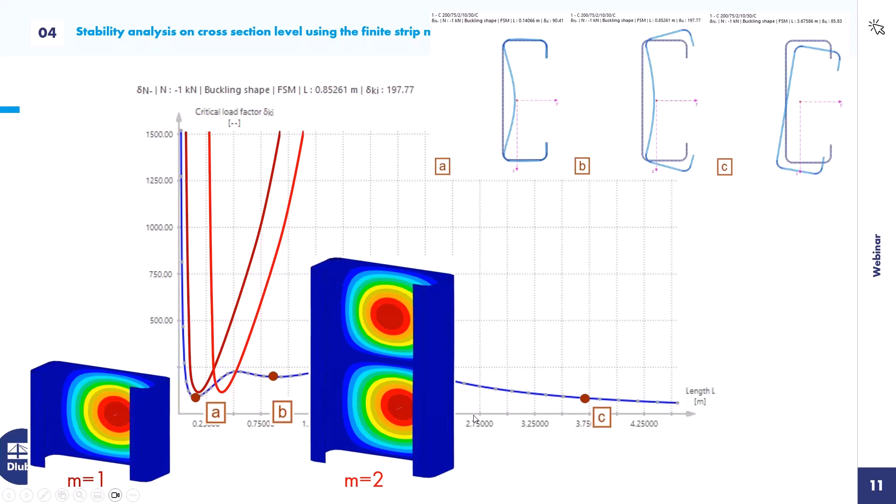That's why we should keep in mind that we not only have one curve for this local buckling with the bow-shaped deformation, but also a similar curve that has its limit or minimum at a multiple of the first critical member length. Here, the first critical member length was 14 centimeters, but at 28 centimeters we have a similar bifurcation load, just that we have a multi-wave local buckling in the web.

We have multiple of these curves, so we should take the minimum bifurcation load for local buckling or distortional buckling as a straight line in this dialog. If we compare this with the signature curve, we get a feeling at what member length global buckling gets relevant again before we have local stability failure.

This is not only a nice tool to get a feeling for which stability phenomenon can be an issue for my cross section. Depending on the member length that I'm modeling, it could be that I can directly see local buckling is not a big deal, and distortional buckling is not interesting for me, I'm in a realm where global buckling will cater the design. Or I could say maybe I'm at a length where local buckling and global buckling could happen at the same time, and I need to take into account some kind of interaction between these stability modes.

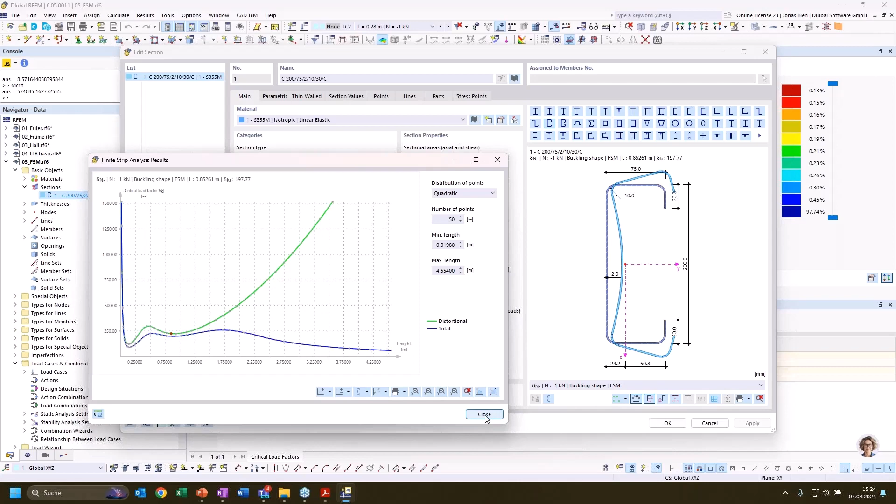It also has a practical use. For cold-formed design within our steel design add-on, we use the distortional buckling curve evaluated on the basis of this finite strip method to evaluate the effective sections of our cold-formed section. So we directly would use this minima, the second minima of this distortional buckling curve, in the design of cold-formed members according to Eurocode 3 part 1.3, and also for cold-formed design according to the American standard, the direct strength method. So it has a practical use and is already implemented in the cold-formed steel design.

All right, that's it for the second topic, the cross-sectional design. The two last topics will hopefully not take that much time to explain.

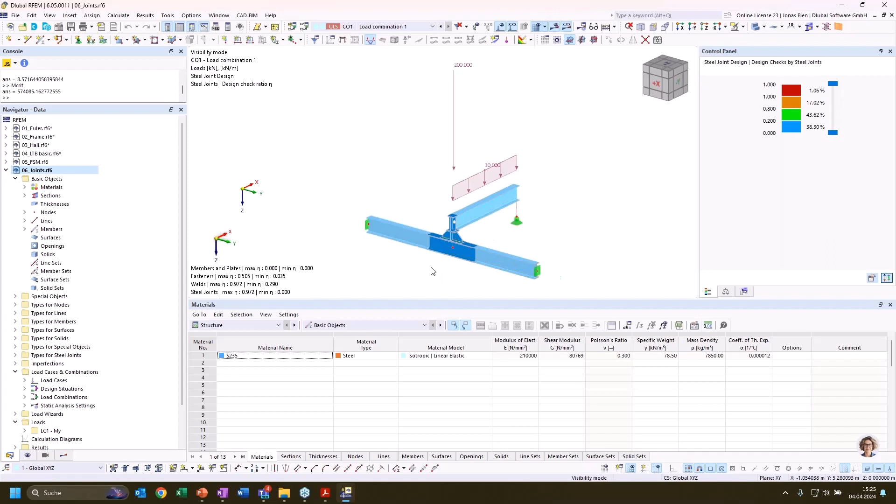I just want to mention as a side note that we can also perform the linear eigenvalue analysis within our steel joints design. To demonstrate this, I have here a relatively easy model where I have a connection between a secondary member and a main member here, and the secondary member is loaded.

I can not only do the usual steel joints design checks, but also perform a buckling analysis. I first want to show you where I can activate it. You can find that in the ultimate configuration for the steel joint, and in the first point, perform buckling analysis.

If you have activated it, then not only the resistance of the components is calculated, but also a linear eigenvalue analysis is performed. We can assess the results via the table. Here we see that we don't only have result values for the stress strain analysis, but also for the buckling analysis.

Now in this table, we get the critical load factor for our 4 mode shapes that were calculated by default. We can also assess or analyze the mode shape by clicking on one of those table entries and opening the steel joints deformation or results button. Now I would see the mode shape for mode shape number 1 in this particular joint.

I can browse through the different mode shapes by clicking the different table entries. I can see that for this particular joint in the first mode shape, I would have some kind of web buckling under the load introduction here from the secondary beam.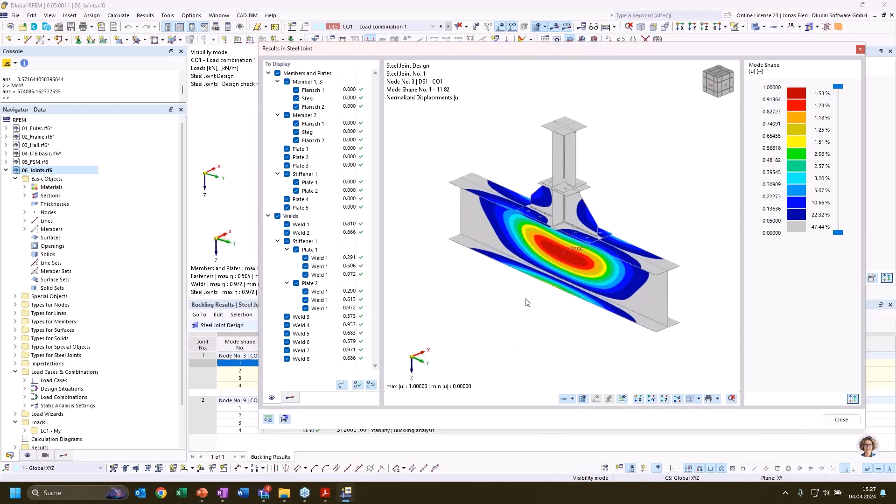Of course I could take some measurements to avoid that, but I also need to take into account the critical load factor in order to judge how critical this mode shape is. We see that for the critical load factor of 11.8, we get this little warning sign, which means the critical load factor calculated is lower than the default limit value of 15. But that doesn't necessarily mean we have a problem here.

The default bifurcation factor limit is derived from Eurocode 3 part 1.1, which is more for member design, and this limit of 15 should be conservative for most cases. But what I would suggest is to really study the mode shapes we observe as a result of this buckling analysis, and then see if we can extract limits for this critical load factor from the respective parts of the design codes.

So in this case, as I said, we have some kind of web buckling under the concentrated load introduction here. I would check chapter 6 of Eurocode 3 part 1.5, where web buckling under patch loading is treated, and see if I can derive limit values here.

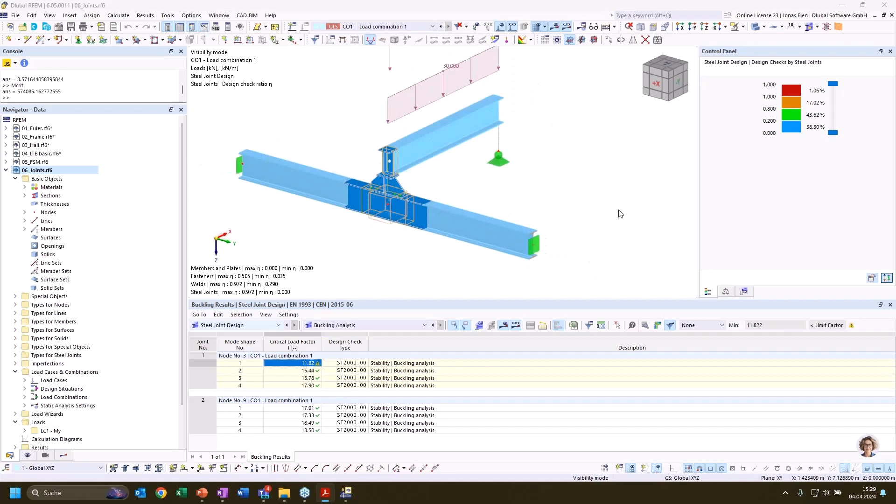If I know the correct limit value and want to improve the behavior, I can directly do that by modifying my joint.

I have a second configuration of this specific connection, where I just added a stiffener in the main beam. We see that the critical load factor for this configuration has already increased from 11.8 to 17 just by adding these stiffeners to the main member web. If I observe the first mode shape, I see that my buckling panel is now divided by this stiffener. So every change directly affects the results of this buckling analysis.

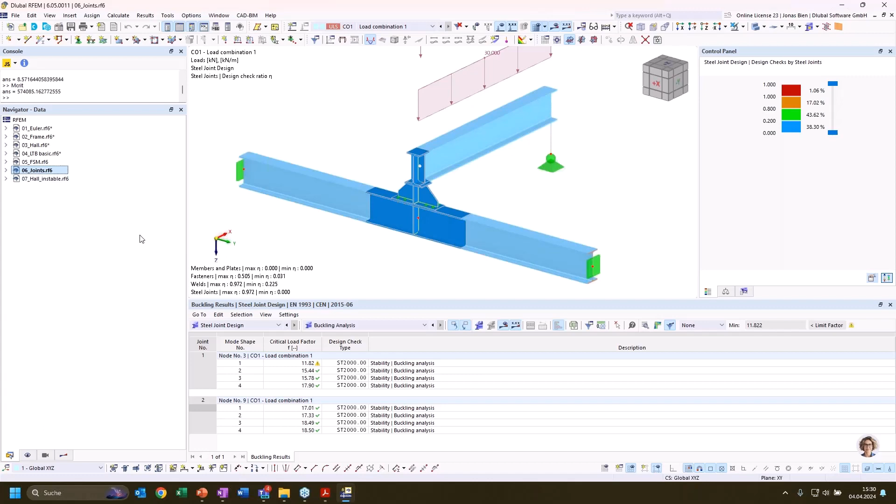Okay, let's move to the last point. I promised to also show you how we can use the structure stability add-on to troubleshoot when we have some instabilities within our model.

I prepared another industrial hall. It's very similar to the third model, but here I reduced the number of load cases a bit, worked with load combinations, and introduced some mistakes which lead to an unstable solution.

For example, I would have modeled all my structure, put in all my load cases, and now I would like to press calculate, grab a coffee, and let the computer do the rest of the job.

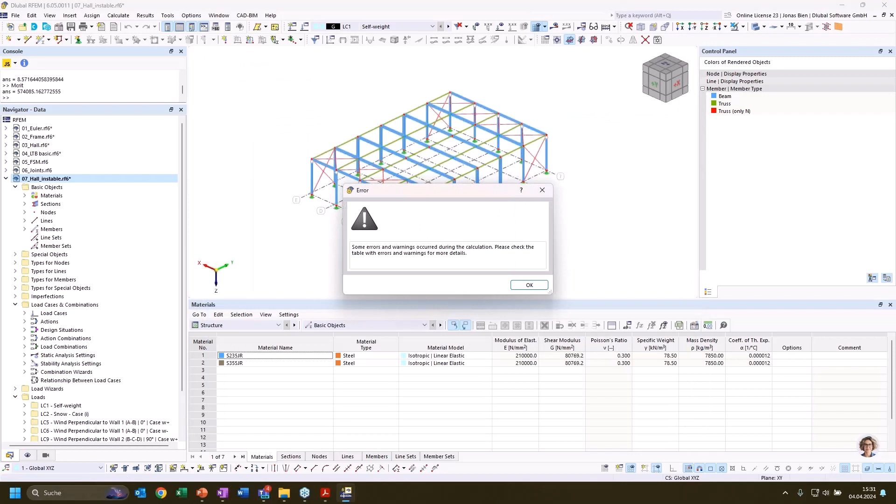But now, when trying to calculate the first load case, just the self-weight under first order theory, I get a warning message, and the program highlights that the stiffness matrix is singular. It also gives a hint where I could look for possible mistakes, but I can't really see anything wrong here.

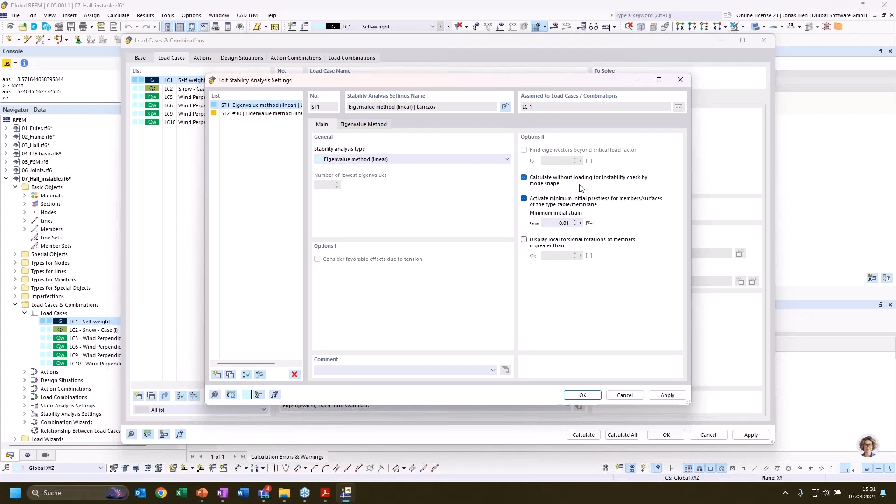I could now activate my structure stability add-on and conduct an eigenvalue analysis with a specific setting. In this case, when I want to check for instabilities, I can say it should calculate eigenvalues without loading for instability checks. Basically it looks for eigenvalues of 0 value and calculates the respective eigenvectors.

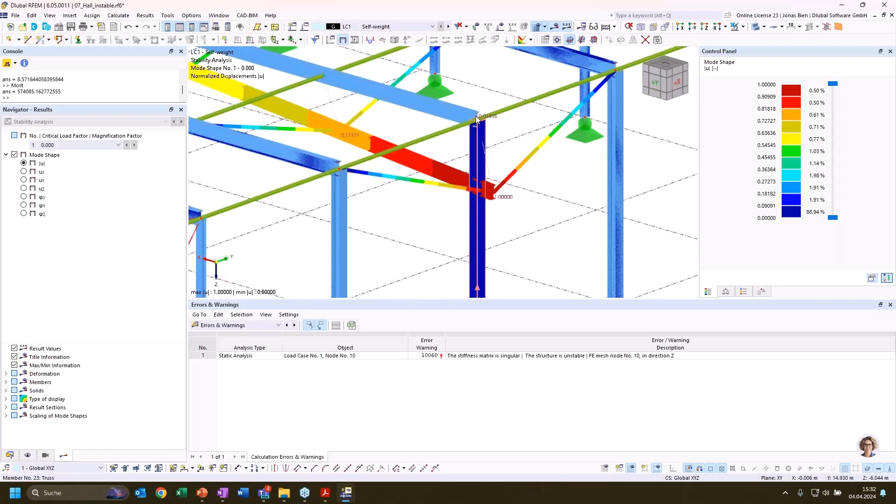What I see now is that the girder in axis number 4 is more or less falling down. It seems like it's not connected to the column. When I zoom in, I see there are two separate nodes, and the column is not properly connected to the girder, which could be the reason for my instability.

I quickly resolve this issue and try again to calculate load case number 1. Let's see if it works now.

Again I get an error message, and again I can try to get additional information with my structure stability analysis. When I click through the deformation results, I see that for the rotations around the global x-axis, something looks a bit off.

I get very high deformation values, and it seems like the girder here in the last frame freely rotates, which indicates it's not properly connected to the columns, or some degree of freedom is not restrained properly. If I look into the connection definition, I see that I have a hinge on every column end.

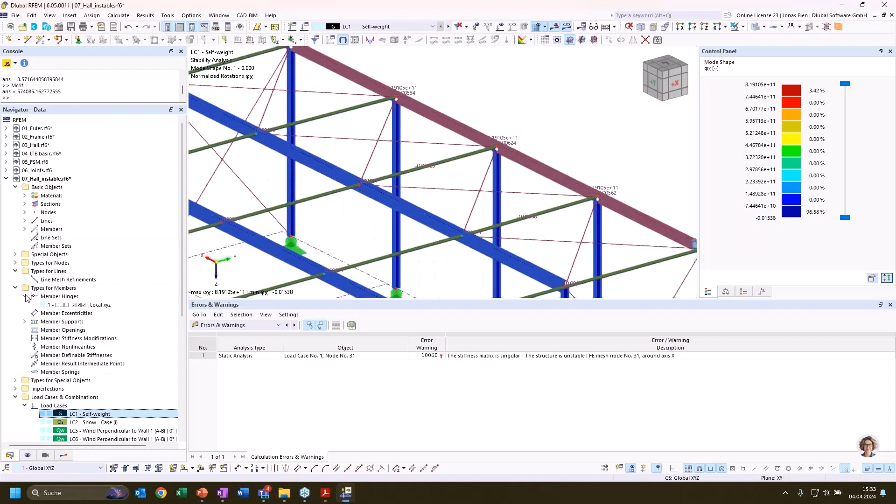I defined this hinge with rotations set free in all 3 axes, which means this member can freely rotate at the top. Maybe that was a mistake, and I wanted to establish frame action here, but I accidentally applied the hinges to all my columns.

Now that I found this mistake, I can remove those hinges in the frame corners, and check a third time if the solution runs or if the simulation works.

And if I haven't done anything wrong, it should work now. Okay, now I get results for this first load case in my static analysis, which means that my model seems to be stable now. And now I want to go to the fullest and calculate all my load cases and load combinations.

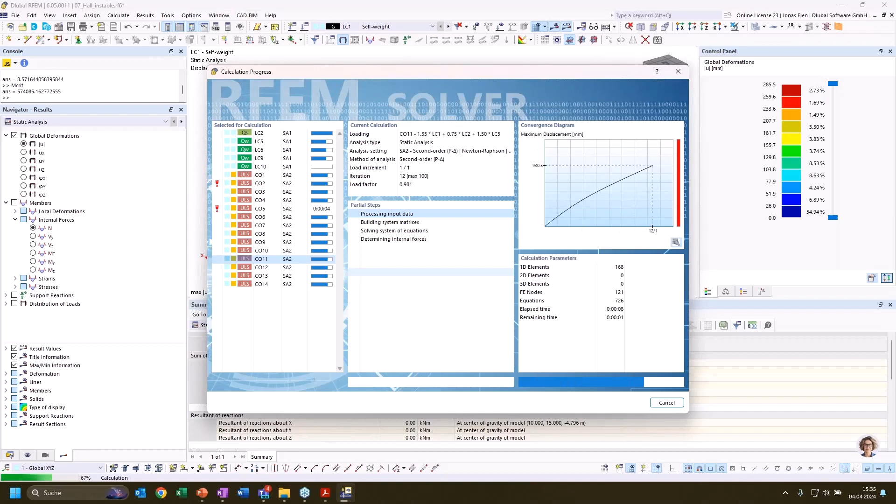That would be the second stage, and it is again not clear that I have no problems with my model, because my load combinations now I solve them with second order theory. And I again get only for some load combinations errors that my stiffness matrix is singular and my structure is unstable. So this message can have two reasons. Either I have done something wrong in my modeling and I've connected, or disconnected parts, or some DOFs are free and not restrained in my model.

Or it could mean that my system is really overloaded because I have now calculated according to second order theory. It could also be that I've reached the critical bifurcation load of my system. And in order to check this, I would recommend to go to the load combination that is problematic. For example, in this case, load combination 5 or 2, and I can just switch to first order theory and calculate, or perform a linear stability analysis, just a regular one.

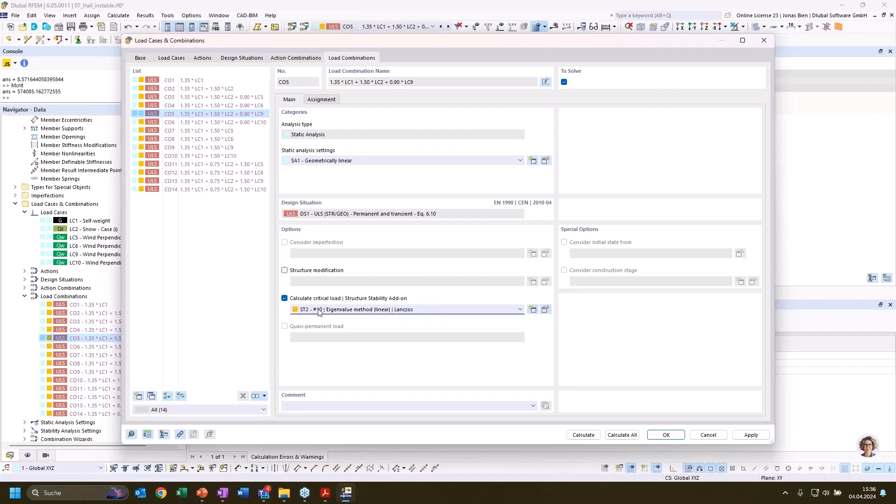Now I just use the second setting where I calculate 10 eigenshapes. Could have taken less because I'm only interested in the first mode shape. And let's go to the results for my load combination 5. And what I can see now is that my critical load factor is below 1. And that indicates that my structure is indeed unstable because it is overloaded. And I can also check what could be the issue based on the mode shape.

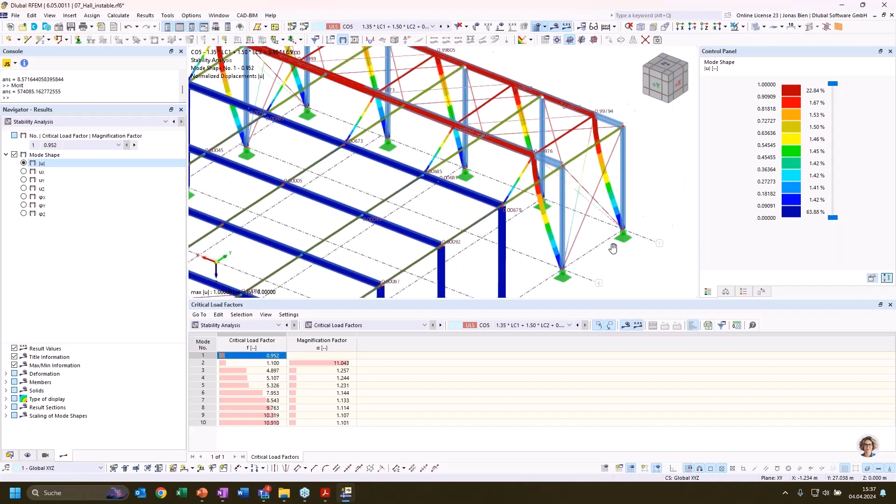And if I now look closely, I see that in my second frame I set the wrong columns. I set the columns from the end frames, which are much too weak for these internal frames. But this can also be quickly resolved by just copying and overwriting the member dimensions with the columns from frame number 3 or 5.

And if we now again perform the same simulation on our load combination 5, we will hopefully be able to get a suitable solution and a stable model. And now we can see, okay, with our first mode shape or critical load factor, we are above 1, and our model is good to go, and we have good chances that we can properly design the members within our structure.

Yes, these were my last words. As I have announced at the beginning, it took me way longer than the 1 hour. I appreciate that, or rather, I don't appreciate that. Excuse me for that, and I hope it was nevertheless that you learned something. It was not pure torture.